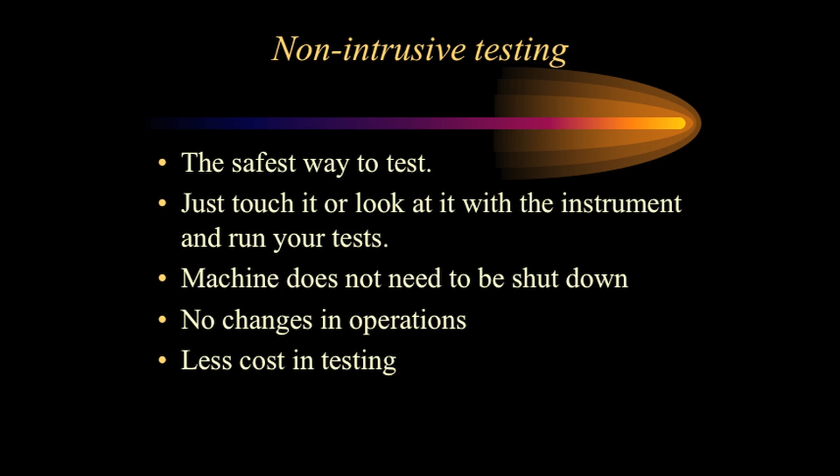Today we're going to talk about ultrasound, obviously. We're going to talk about some infrared, and then we're going to talk about some alignment. Okay. Non-intrusive testing is the safest way to test, if you think about it. We're not going to bother the machine. We're not going to interfere with operations, so that makes them happy. So we just touch it with the instrument or look at it and we run our test. It's a pretty simple operation.

Sounds pretty simple. The machine does not need to be shut down. In fact, we would rather have it at a minimum of a 40% load. I want to check it the way it runs, not while it's on vacation. Okay? So if it's in neutral, I'm not getting a true reading.

I want no changes in operation. Obviously, there's less cost in testing because we don't have to shut it down.

With that in mind, we need to think outside of the box. Since we were children, all our life we've been trained: if I can't see it, it's not there. We prove that every time we see something that bothers us, we cover our eyes. We duck from it.

If I can't see it, I don't have to worry about it. Ultrasound is the same way. Anytime we heard something we didn't like, what do we do? If I can't hear it, it's not there. I don't have to worry about it.

What I'm suggesting is there's a lot of things going on in this world that we can't see and that we can't hear. So we need to turn that to our advantage. We need to think outside of the box. This is not a Taco Bell commercial. We need to get outside of that and let our imagination go crazy, because when we do, we start using it to our advantage.

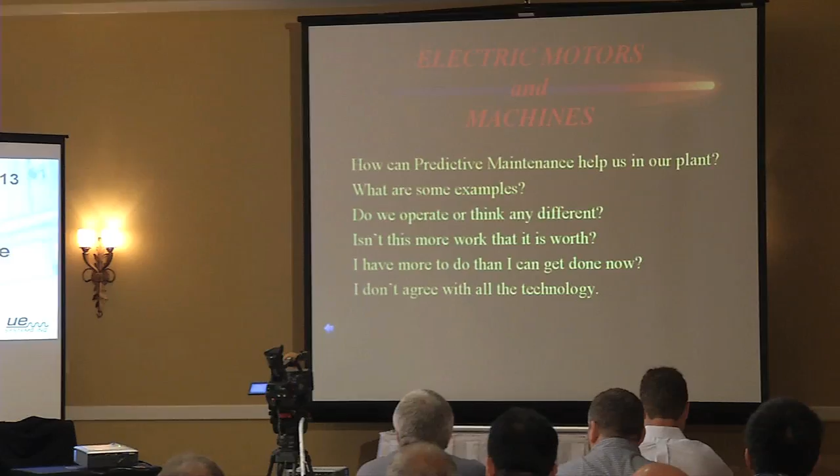The second one is the one that kills me. I actually have people I go in and talk to, and they say, I've got more work to do now than I can get done. I don't need you coming in my plant finding more stuff for me to do. The first thing I tell that individual is, if that's your attitude and mindset, you're too stupid, I don't want to work for you anyway. Why would I waste my time on a guy with an attitude like that? Because I guarantee you, I ain't changing his attitude. So I'm not working for him, I don't want to work for him.

Then I have this guy on the bottom who says, I don't agree with technology. This one kills me, okay? I do a lot of seminars around the United States, and the first thing I do is have everybody take their phone out and lay it on the table. They all do, and I look, there's a phone laying in front of every one of them. So then I take my box and go to the table and start picking up all the phones.

And the guys start screaming, I can't go without my phone. I said, whoa, wait a minute, this is the guy that doesn't agree with technology? I can take this phone right here, right now, and talk to anybody in the world. I can get in my bank, change accounts, transfer money. I can do anything I want to do with this phone.

10 years ago, if you were on the road and wanted to make a phone call, what did you do? Stop and put a quarter in a payphone. Find one today. If you find it, buy it, because it's an antique. Now, with that in mind, think about where we're at today and where we're going to be 10 years from now. That's scary. What we can do today compared to 10 years ago, and what we can do today compared to 10 years from now. You buy a computer today, by the time you get it home and set up, it's obsolete. Literally, it's moving that fast.

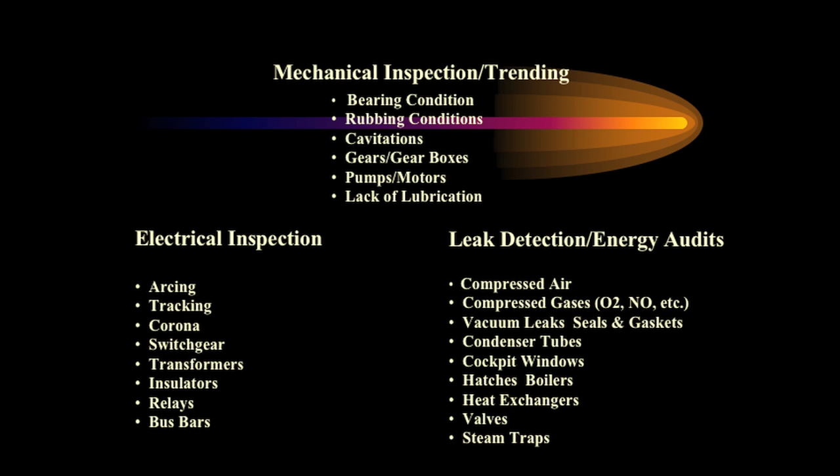I have used infrared and ultrasound on every application you see up on the screen. I'm not going to bore you all with going through every one of them, but if you see something up there that piques your interest, catch me after we're done here and I'll try to explain what we've done or how it happened.

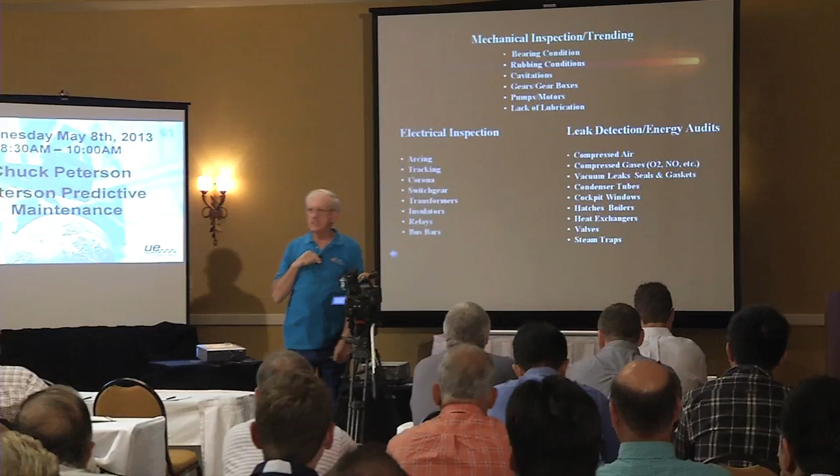The biggest bang for our buck is ultrasound. It's going to be right here, and safety-wise, it's over here. Anytime I go to an MCC that's got a whole big line of buckets where we're going to open all those doors, I take my ultrasound, put the rubber focusing module on it, and listen around every door before I open them.

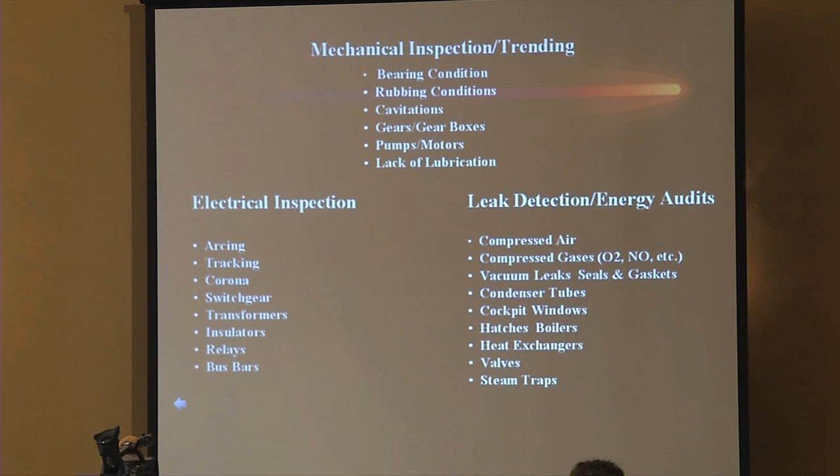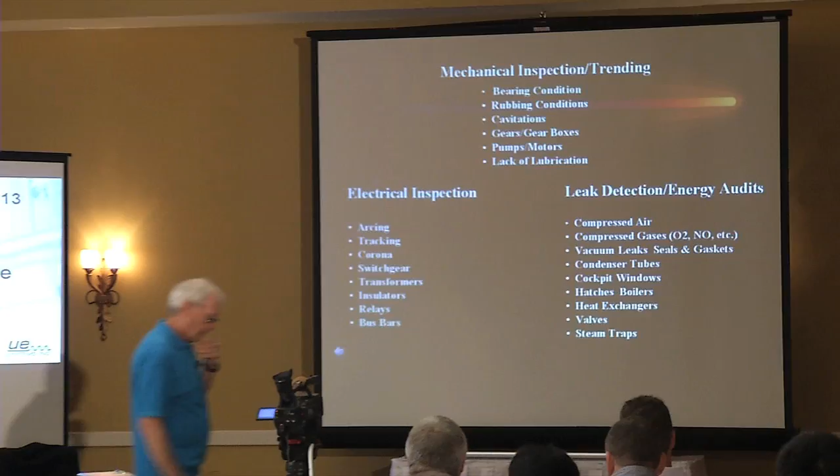If it sounds like an arc welder inside that door, I probably ain't going to open it. So we have the safety thing, and we have the arc flash thing we need to be concerned with. At the risk of banging on NFPA, I think arc flash is way overrated. It's dangerous, it is, and I'm very, very sorry that people get caught in arc flash. I open 25,000 buckets a year, and knock on wood, I've never seen an arc flash. I hope I never do.

So let's get real with numbers. We need to think about common sense. When we open a bucket, listen to it first. Even if you don't hear the sound, open the door using it as a blast shield, and then move around to the outside of 42 inches. Common sense. NFPA tries to dummy-proof it, and what we really need to do is get rid of the dummies. And that's what we're not doing. So we need to think about things like that. Okay, I'll get off my soapbox.

On the fire department side, NFPA, National Fire Protection Association, I fought them for 20 years because they write the laws so that they can't be sued. I can guarantee you, do we have any electricians in here? You've probably read up on NFPA 70E. By the letter of the law, if you haven't circuit tested every one of those breakers so that they kick out as they're designed to do, you cannot open that door.

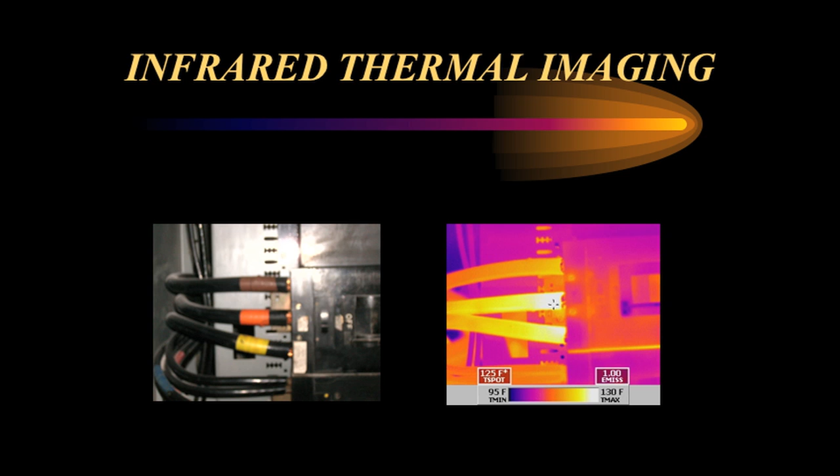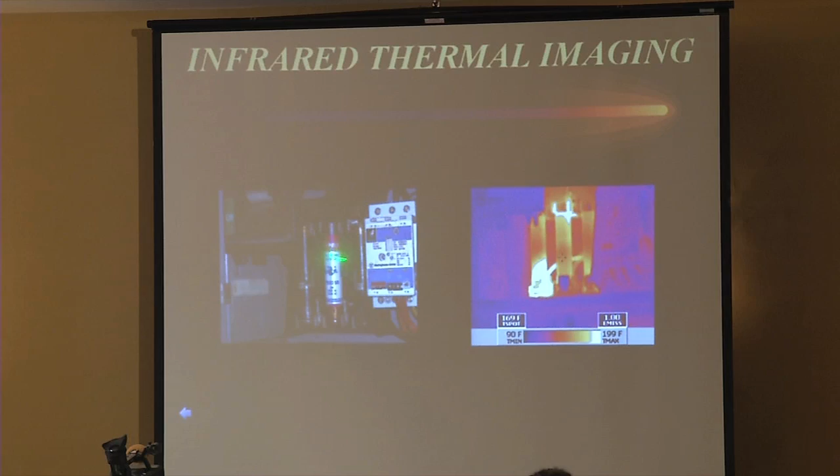Two different fuses. We have some electricians in here - when you put in a new MCC, you have a full box of fuses. You put 3 fuses in, they're all the same. What is different there? Different fuses. That tells me already we've got a problem. We blew a fuse at one time or another, so there's a problem straight away.

And the other thing is, this may have been the problem because we got a slow blow fuse in there. We didn't fix the problem, we just put a fuse in there to last longer. Now, if we don't have the infrared picture, we don't know we got a problem here.

Doesn't take a rocket scientist to figure out where our problem's at here. The lighter the color, the hotter the temperature, okay?

Again, loose connection - what is different? We got 3 phases, A, B, and C here. They're all coming from the same load, going through the same switchgear, going to the same motor. They should all 3 be relatively near the same. Well, obviously the situation here, they're not.

Okay, next one, this is another bucket the same way, it's just turned upright instead of laying on its side. But you can see in the center, we definitely have a problem here. So infrared is now showing us things we haven't seen before. It's going on, we just don't know it. If you don't have this picture and you look at this, you don't even know you got a problem, all right?

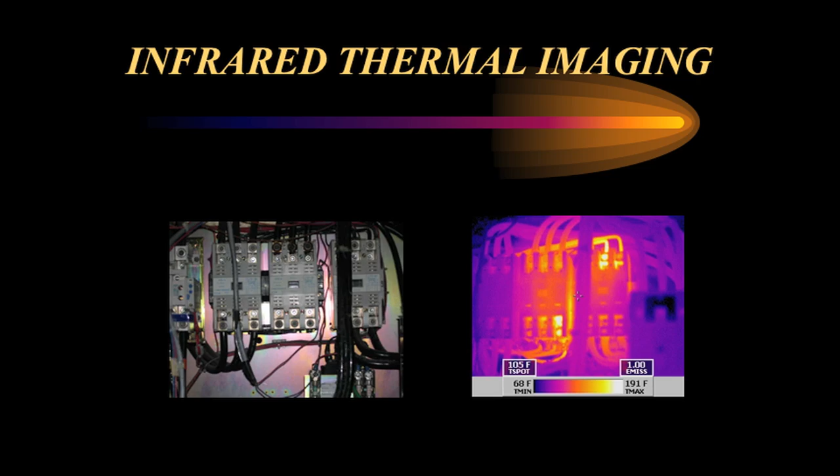Variable speed drives - how many people got variable speed drives? Everybody's got them, okay? These are notorious for having problems.

The reason why: when you energize a wire, it warms up. As it warms up, as everything else does, when it gets warmer, it swells. When you shut it down, it goes back to its natural state. So now when you're ramping your variable speed drive up and bringing it back down and ramping it back up, it's swelling and shrinking, swelling and shrinking. That screw doesn't move, so actually what's happened is swell, shrink, swell, shrink - we've got a gap in there now. The power has to jump across that gap.

How many of you can remember - some of you look old enough in here to remember - when I used to have my old car, I'd set my points with a little wider gap because I'd get more power and a hotter spark at the plug, because it takes more power to jump across that gap. The same theory is happening right here. More power, more resistance, more heat. What is different? Doesn't take long to figure it out here, okay?

Look at this one. That screw right there is loose. Look what's taking place here. This is a critical machine. I'm from Hutchinson, Kansas. This is a 500-bed hospital. This is the controller, variable speed for the air conditioner, 200-ton air conditioner that runs the entire emergency room.

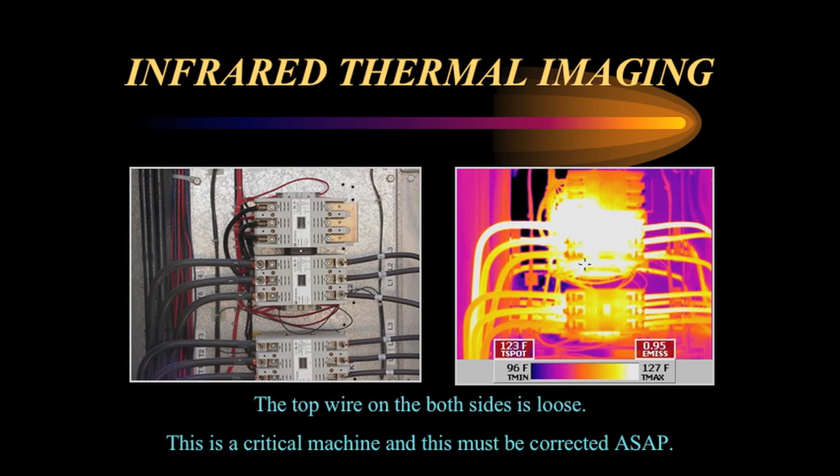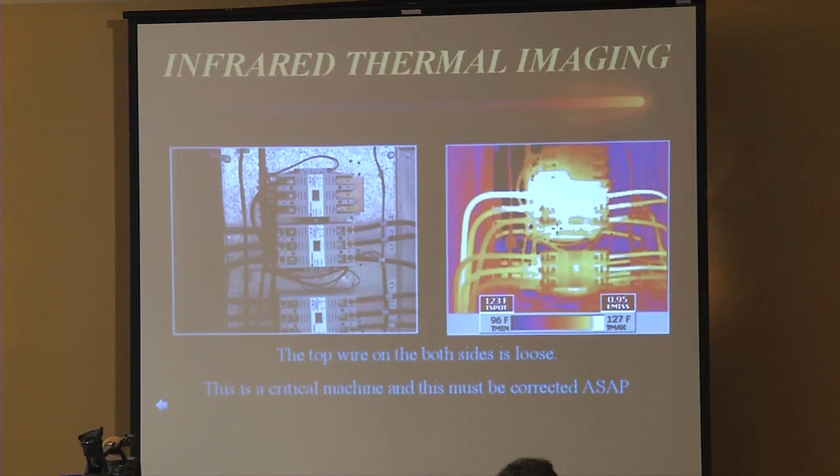Two things we have to think about here. The first one is doctors don't like to sweat. And they're pretty adamant about that. The second thing is nurses like it even less. Okay? So, what we have to do here is think about what are we going to do if we lose this air conditioner? All right? I found this on Friday, the Friday before Labor Day weekend. Early September. Okay? Pretty hot out, pretty warm out.

I called Bill and I said, Bill, we got to shut this machine down. He said, you are out of your mind. Remember, doctors and nurses don't like to sweat. I said, well, if we don't shut this down, somebody has to make a decision here, because if we don't make a decision, it's going to. When is it going to fail? I'm thinking about Saturday morning, 2 o'clock in the morning.

We don't have any staff here. What staff we do have is out at the lake, and they're probably drunk. So now I got to call them into work. We got to get this thing done under emergency conditions, so we're not doing things the way we should do them. So it's a fire department putting out the fire. I told Bill, let's shut the plant down. Let's shut this machine down. He said, no, we ain't doing that.

I said, okay, do me this then. Go to the thermostat and turn it as cold as you can turn it. He said, what's that going to do? I said, well, it's going to load that air conditioner up. But I want it cold enough in that emergency room that the nurses are wearing sweaters. He said, well, again, what's that going to do? It's going to buy us some time. Because I can come out there at 8 o'clock tonight.

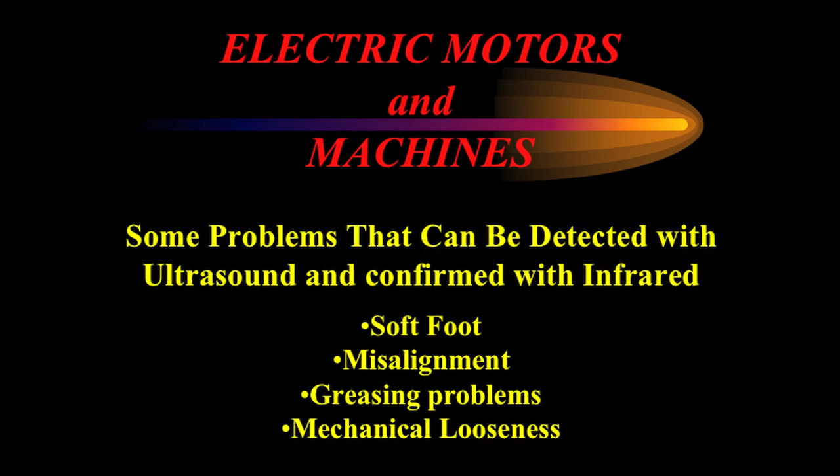Soft foot. Does anybody not know what soft foot is? Okay, what happens when we set a motor down on a skid or down on a base? That base has been machined so it's all level, okay? When we set the motor down, the feet of the motor have also been machined so that they're all level. How many of us have sat at a table that has one short leg on it and it wobbles, okay? So what happens if we bolt that down or we force that motor down and they're not all milled the same? We actually force one leg down like this.

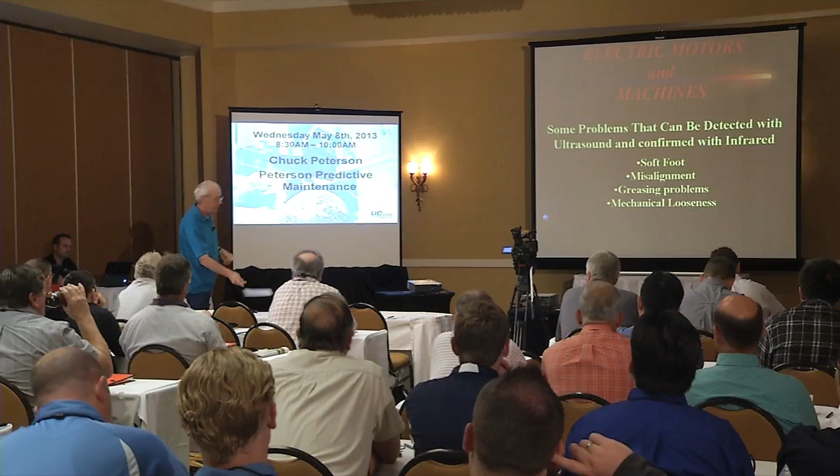What we've done is we put a twist in the motor case. We put a twist in the motor case, we're going to start seeing hot spots in the motor, okay? So we can see that. We also can hear that with ultrasound. All right, misalignment.

I've had people tell me that you can't see misalignment, you can't hear misalignment. I'm telling you that you can. I do it every day. My staff does it every day. They say you can't tell misalignment with ultrasound. I'm going to show you you can.

Okay? Greasing problems, a real pet peeve of mine. We've had some demonstrations on greasing and lubrication. This one here is a real pet peeve of mine, and we'll talk about it. And then mechanical looseness. The first thing we have to do, though, before we can do any of this, is we have to make a motor ready for service.

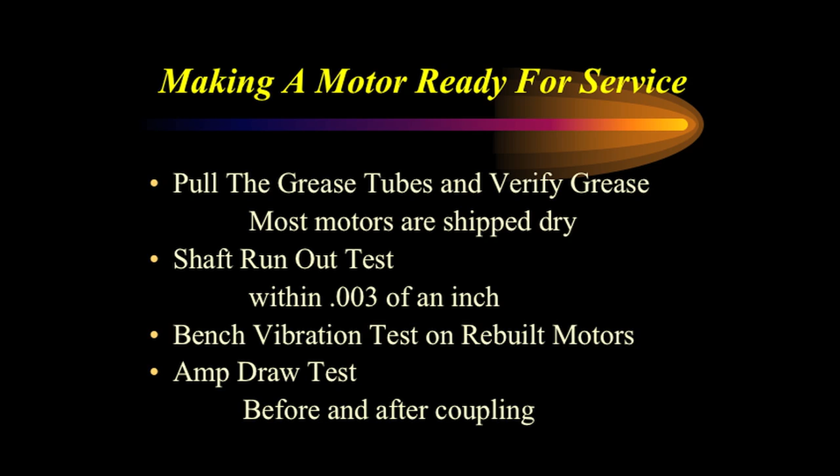How many of you, when you get a new motor in your plant, it's sitting here on the crate, how many of you pull the grease tubes out of the motor to make sure there's grease in them? Not one hand. I'm telling you, they are empty. You go back to a new motor and pull that pipe out of there, I would almost bet you my firstborn son that pipe is empty.

Because the motor company doesn't know if you're using moly-based grease or poly-based grease. So they don't put anything in there because moly and poly are like twin sisters. They don't get along. Okay? What happens is they'll form an acid that will eat the race out of your bearings in 3 to 5 years. So the only grease that's in that bearing is the grease that was put in at the factory, and that's to maintain that bearing during the shelf life before it's installed. That is enough grease in that bearing to actually run your motor for about a year.

How long is the warranty? So we got enough grease in there to go a year to get us just out of warranty, and then we're going to buy a new motor from the same motor company that just shafted us on the one that just failed because it wasn't greased.

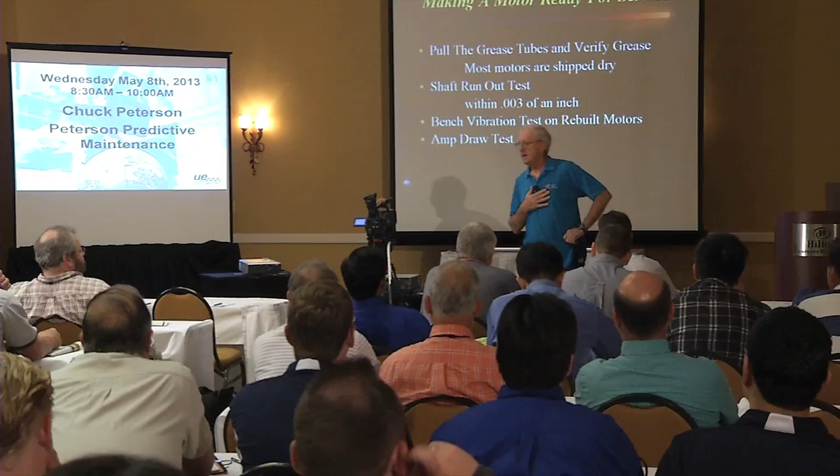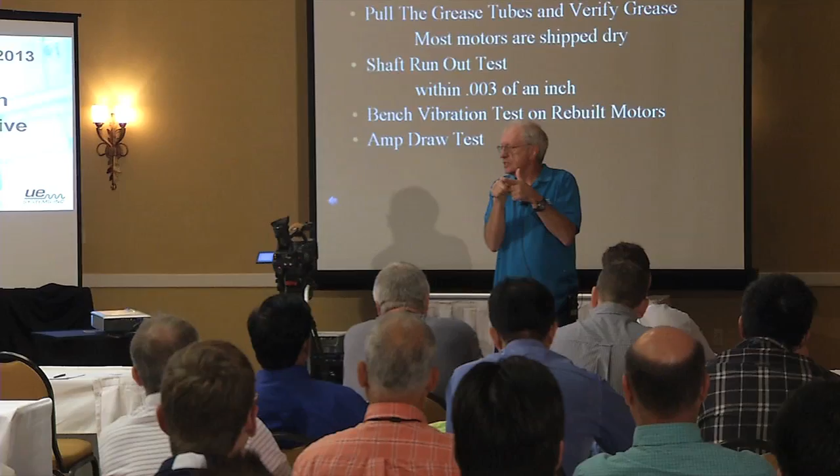So Gary calls me and says, I need a 100 horsepower motor. I said, okay. So I take it to Gary, and he sets the motor down on the bench, takes a dial indicator, puts it on the shaft, runs it from the keyway all the way around to the other side of the keyway. If it moves more than 0.003 of an inch, you do not accept the motor. Reject it. Send it back.

We're going to have to align this motor to within 0.003 of an inch. If it's 0.005 out over here, when you roll it to the other side, it's 0.005 out that way. We're 0.010 out already. There's no way we can align this within 0.003 if we start out 0.010 off. So you reject that motor.

So the motor company takes the motor back. They put it on the shelf. The next day you call and you want a 100 horsepower motor. What motor do you think you're going to get? You're going to get his reject, because they're not going to send it back in. They're going to send it to somebody that doesn't test their motors.

We have got to run that test. We've got to run that test to protect ourselves. I'm not an experimental field. I need reliability. And if I don't run that test, I'm shooting myself in the foot again, okay?

Bench vibration test. I ran vibration for about 6 years. I don't run vibration anymore. I can get better, faster, more accurate results with ultrasound than I can with vibration. I'm not saying vibration is bad. I'm just saying I can do it faster and quicker and get the same results with ultrasound.

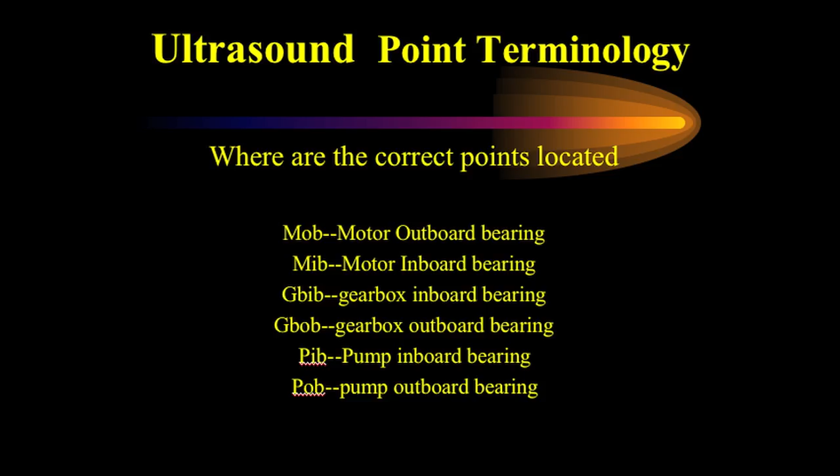Now you hear drive end, opposite drive end, shaft end, fan end, all of that different terminology. If we would just standardize to motor outboard, motor inboard, gearbox inboard, gearbox outboard, pump inboard, pump outboard, it's pretty easy. The pump outboard, that's the impeller out on the end. It's kind of like the fan on the other end, isn't it? So we started at the fan end of the motor and just took the power stream right through the machine. And it makes it a lot easier.

Now, if Peter from London calls me and says, Chuck, I'm having a problem with this motor outboard bearing, I know exactly what bearing he's talking about because we're on the same page with terminology. If he says, I have an opposite shaft end bearing that's giving me a problem, I'm thinking, what are you talking about? But when he says motor outboard bearing, I'm there right now. No question about it, okay? This is very important. So that's something we really need to pay attention to, okay? Next, yes?

Gearbox, follow the pattern, okay? I have a motor here, a gearbox here, and a pump here. Input side, exactly. Your gearbox depends on if you have an intermediate gear or if it's just a direct drive. You have A shaft and B shaft, or A shaft, B shaft, and C shaft. But it's gearbox inboard A shaft, outboard A shaft, inboard C shaft, outboard C shaft. You have an inboard side and an outboard side of the gearbox as the power goes through the machine. Okay?

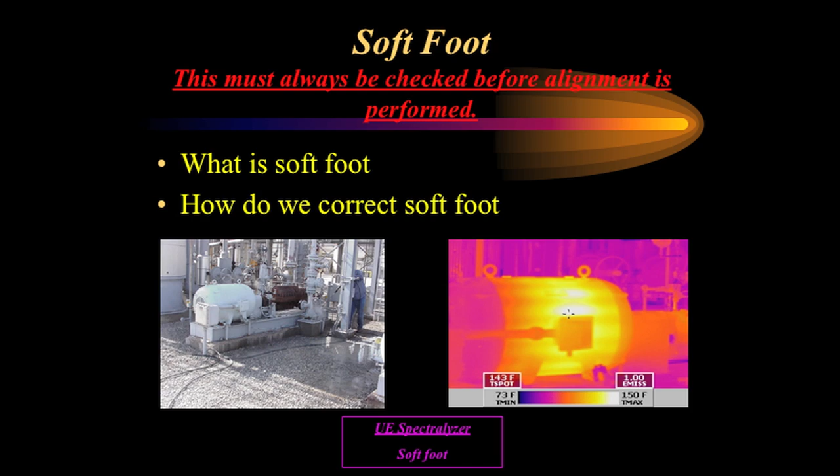All right, soft foot. Here's one right here. Remember I said we put a twist in the case? This is an example of it. That's the hot spot that's going to show up with infrared. We have a 10 thousandths soft foot under that foot right there. That is a 300 horsepower motor running on 2300 volts and costs about $25,000. And we're wasting the motor because we have a 10 thousandths soft foot that's not been corrected. This was found with ultrasound.

Can you drag the Spectralyzer over onto the screen? Okay, we need to go up to File. May have to drag it. Soft foot before. Should be down at the bottom of the list. Okay, play it. Listen for the surge.

Can everybody hear the surge in that? Okay, what we did was we corrected the soft foot. All right? Now, remember we've got one foot that's 10 thousandths, right? So logic would say we let that foot come up and put a 10 thousandths shim under it. But remember the table that rocks with the short leg?

Okay, instead of putting a wedge underneath one leg, what we should actually do is put a wedge underneath the two opposite legs. So instead of a 10 thousandths shim going under one corner and letting the motor sit there already crooked, we put 5 thousandths over here and come to the opposite corner and put 5 thousandths there. So we stop the rock. Okay? So that's what we did. Okay, play the next one. It should be soft foot after.

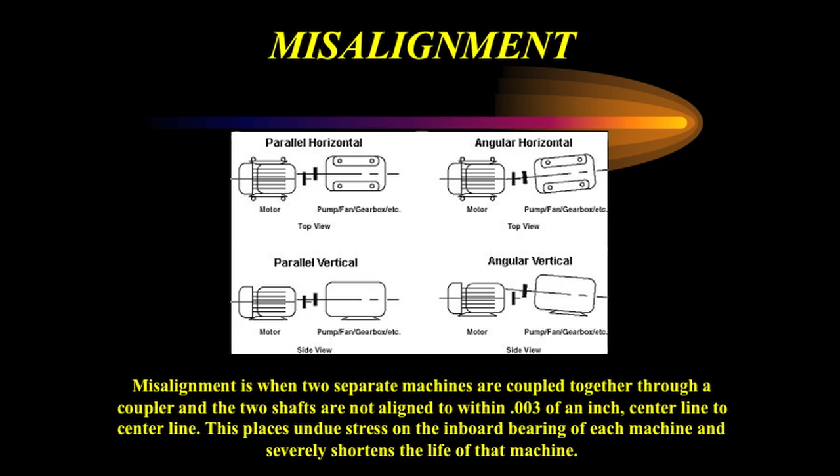This is what we have for misalignment. If you notice the bottom of the motor, here we see all 4 feet. That means we're looking down onto the motor. Here we see just one set. That means we're looking at it from the side. Okay? You can see the types of misalignment we have: parallel and angular misalignments. Okay?

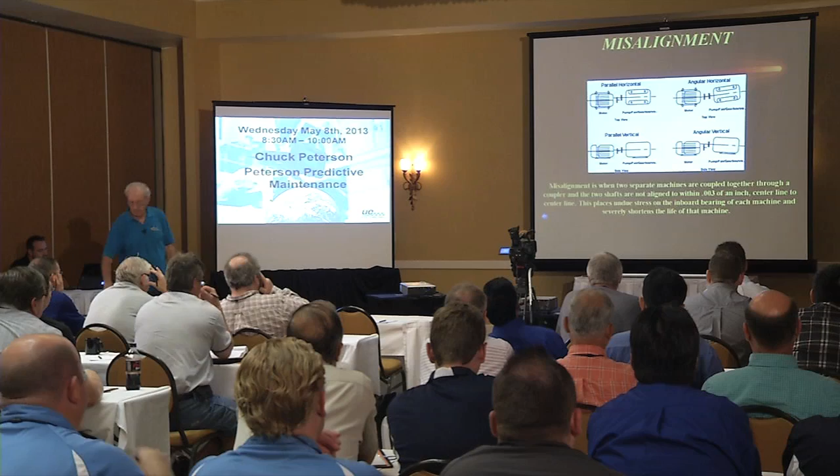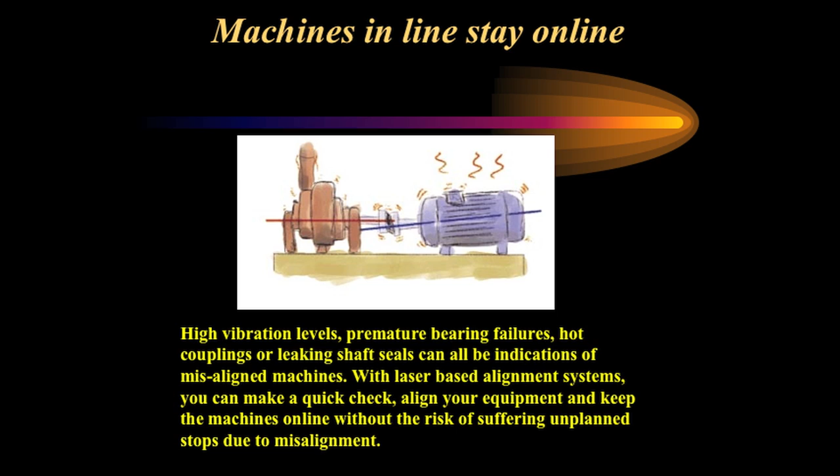This happens every day. Every day. This is what it usually feels like. Okay? This motor over here has got 4 bolts holding it down. That's it. And the coupler. That's it. The pump out on the end, it's got all this big piping and all this bracing and all this stuff. It don't shake a lot. But that motor's out here jumping all over everywhere. Okay? That's another indication of misalignment. Now we've got 2, right? We got the motor jumping around and we got the louder bearings. Okay? So let's move to the next one.

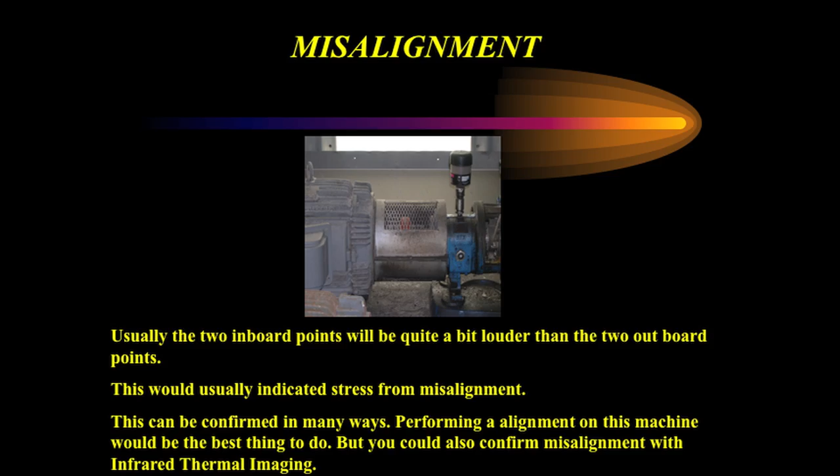We look at this motor. This motor to the eye appears there's no problem at all. We take an ultrasound reading. The 2 inner bearings are louder than the 2 outer bearings. I pull my camera out and look at it. Doesn't take a rocket scientist to understand this picture. Okay? Right away, I have now combined 2 technologies to prove one point. That's the importance.

I could take a vibration on this and find I would have a big spike at 2 times the turning speed, which indicates misalignment. Okay? So it doesn't take very long to figure this out. The idea is we're thinking outside of the box. We're hearing things we've never heard. We're seeing things we've never seen. And we're using it to our advantage. Okay? Let's look at this.

We realigned this machine. This is the way it was when we found it. Look at this, 91 thousandths out of alignment. This one must be the one they used the 2 squares on, or the tape measure. But you can see after we aligned it where it's at now. Those are not thousandths. Those are tenths of a thousandth. This machine was to align to less than 1,000th.

When we first started on this machine, I could take the coupler and I could barely turn it over. When we got done, I could lay my hand on the top of it, let it fall off, and watch the motor coast to a stop. That much stress was taken out of it because of the misalignment. How much easier would that motor run if it's aligned properly? How many less amps would it pull if it's aligned properly? So now we're not only saving the machine, but we're using the energy efficiency aspect of it.

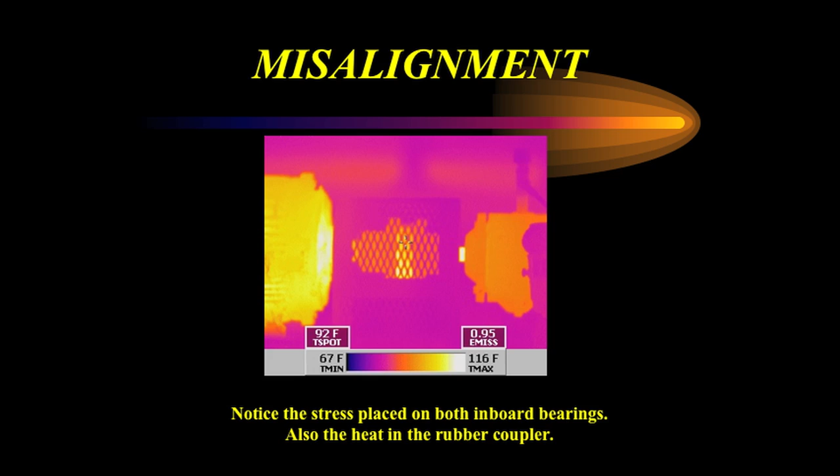How many of you have taken a piece of wire and take it back and forth like this till it breaks? Gets hot, don't it? That's what's happening to that piece of rubber in the center of this coupler. Those hubs are sitting here doing this, and they're actually heating that rubber up. There's no other reason for that rubber to be hot. You see on the sides, the coupler's not hot, or not that hot, so why would the rubber be hot? Other than the fact that it's just sitting there beating it out. Okay? Misalignment.

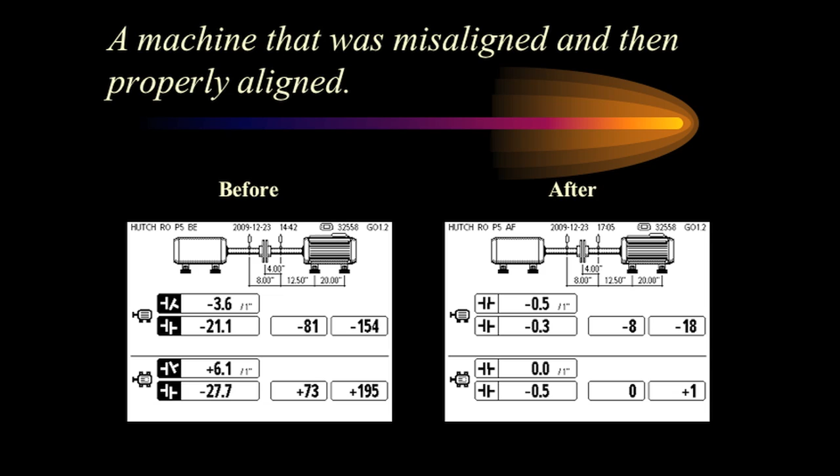You can also see how when we realign this one right here, dead center. That can be attained. That can be done if you do it right the first time, and you take the time to do it right. Now, this machine goes down. I got management back here chewing on my backside. Let's get it done. I got to get it up and running. And I'll turn around and tell them, and I'll tell you what, it'll make them mad.

Hold it. You give me time to do it right the first time, I only have to do it once. If you hurry me, where it's in emergency conditions and I get in a hurry and start putting my hands in where they don't belong, or start taking shortcuts, and then I come back without a finger, it's going to be a lot more expensive to do it that way than if you just allow me the time to do it right. I only have to do it once, instead of doing it wrong in a hurried fashion and having to come back here in 6 weeks and do it again because the motor failed. So the point is, take the time to do it right the first time.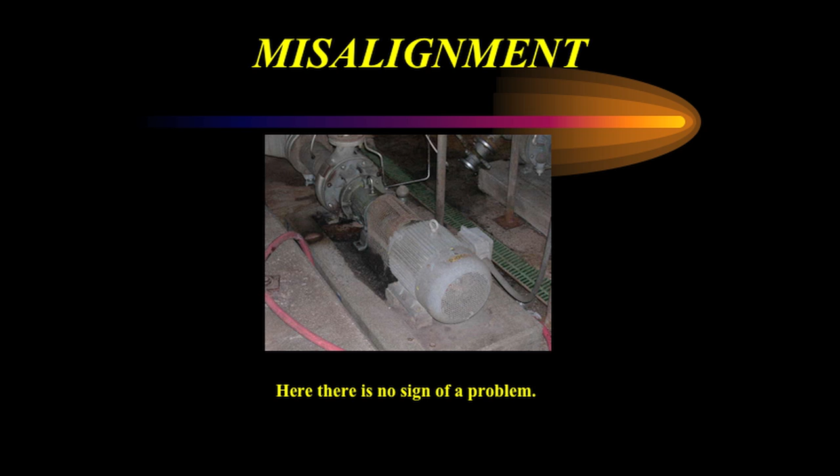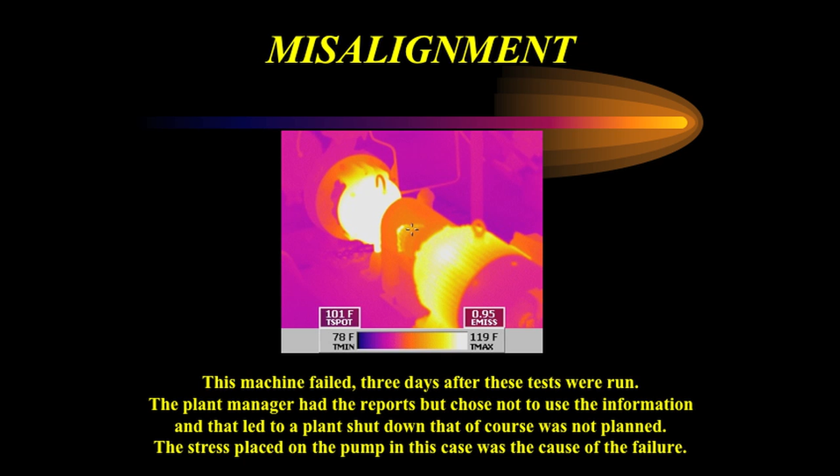This machine appears to have no problems at all. This one here is a classic. Appears to have no problems. We look at it with infrared. The sound, the ultrasound, told us it was misaligned. We look at it with infrared. Obviously, look at that pump. That pump is not long for this world. 3 days after we run this, we give them the reports that day. 3 days later, they decided they didn't want to shut it down. They're not going to take care of it. That night, it failed, and it shut the plant down. Shut the entire plant down because they didn't want to take care of the problem when they had the opportunity.

This is one that some guys wanted me to throw in. I showed them last night, so I'm going to throw this in for Stan real quick. This motor here was like that little cartoon we seen a while ago. It's shaking and jumping around, okay?

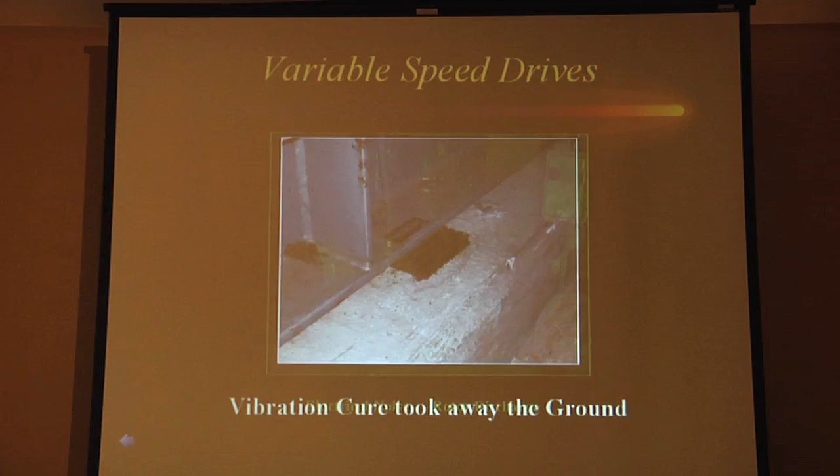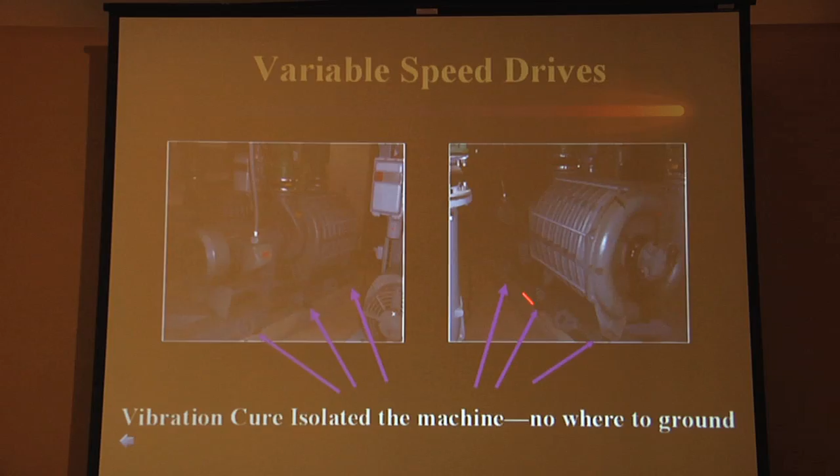So they decide they're going to fix that vibration in it. So what they do is they put vibration dampeners in it, under the feet, under the skid, all the way around it, okay? And they done a good job, they put a lot of them in. But what they also done was they insulated this motor from ground. Look here, those are rubber expansion joints to keep the vibration from working on the piping, okay? Right here, that's PVC. So everything they've done to this machine isolated it from ground.

It's a variable speed drive, okay? So now what they've done is, by isolating it from ground, they were actually having a rotor charge up. It started fluting the bearings in the motor, so they put ceramic bearings in it to stop that. Now, because it's still isolated from ground, it's going from the motor through the shaft, through the coupler, through the blower, out to this bearing right here, and that bearing on the outside failed. And they wondered, well, we put ceramic bearings in it, why did it fail? Well, it's got to go to ground somewhere. Because that's a thrust bearing on that end, the grease film or what little bit of insulation there was is a lot less there because of it being a thrust bearing, and the configuration of the bearing, it went to ground quicker there.

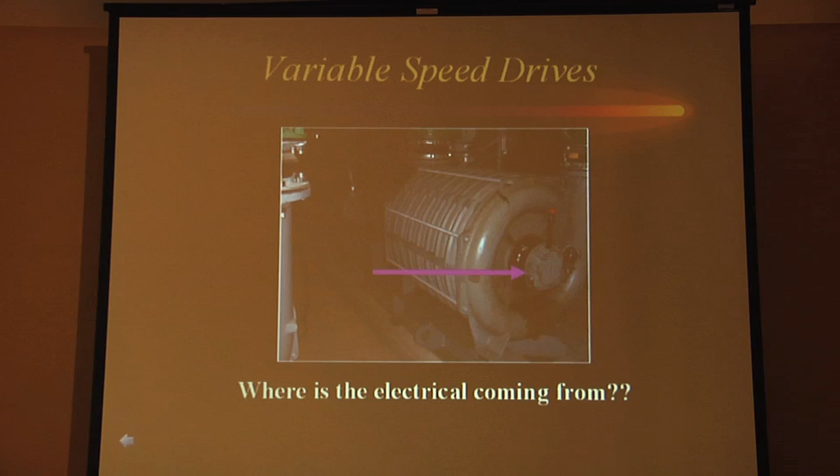Okay, now the killer. The real killer of this is that motor was shaking around the way it was. We checked it, it was 65 thousandths out of alignment. That's why it was shaking. So they put rubber feet under it to try to solve that problem, and they created a bigger problem than they had to start with. We took the rubber feet back out from under it, aligned it the way it should be. That was 2.5 years ago, and this machine still runs today because it was aligned properly to start with. So sometimes we get into a rut, or we jump to a conclusion, and we don't really know what's going on without checking out all the factors. And that's exactly what they done here. They created more of a monster than they had to start with. But they never checked everything to start with.

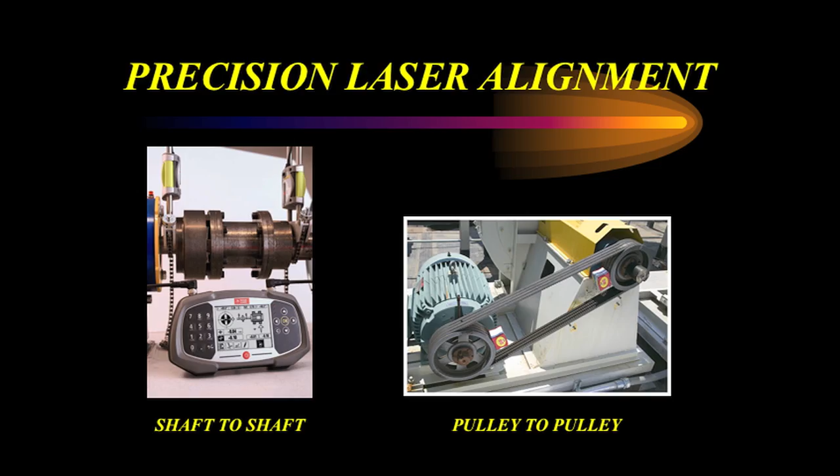So we'll move on. This is the lasers that I use. This one here is for the shafts. These are for pulleys, and I can align belts and pulleys on 3 different planes with those, okay?

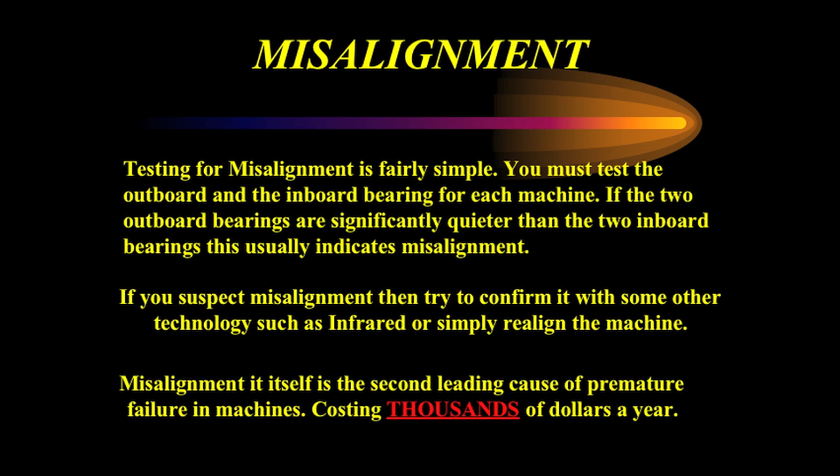So testing for misalignment. Testing for misalignment is very simple, we just done it here a while ago, okay? We want to confirm it, okay? Can it save the bottom line? Obviously, it can add thousands and thousands of dollars, okay? So, we move on.

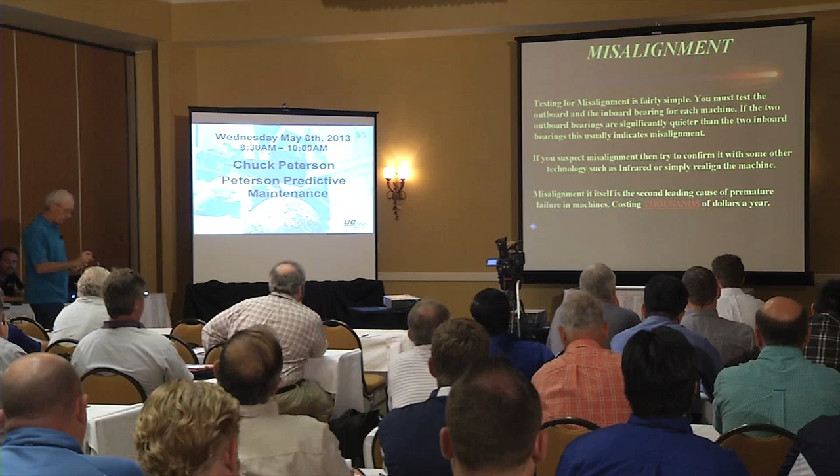If misalignment is the number 2 cause for premature motor failure, what's number 1? Improper lubrication, thank you very much. So many times I hear lubrication, that's not always it, because sometimes it's better not to lubricate it at all. Because we have people in the field that say, you know what, if 3 strokes is great, 6 strokes ought to be freaking awesome.

They're killing themselves doing that exact thing. It's kind of like the arsonist when I was investigating fires - if 1 gallon of gas makes a pretty good fire, 50 gallons ought to really make a blower.

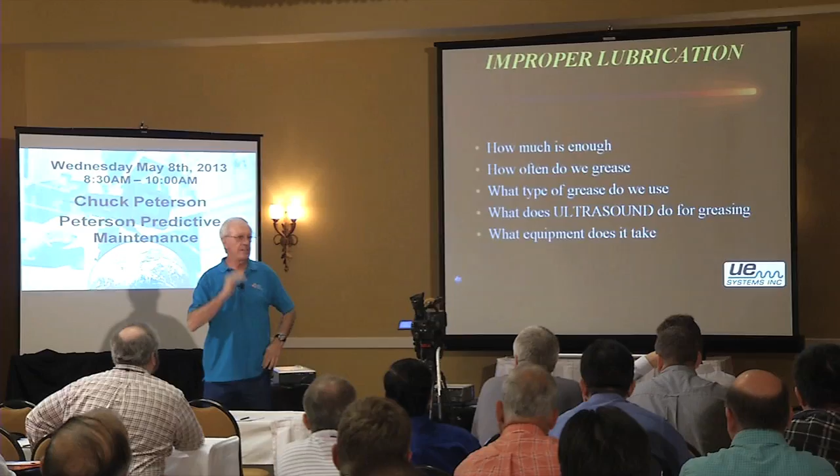We can't operate under that theory, okay? So what happens is, how much grease is enough? How many of you have taken your grease gun at home and just went squirt? How much grease is that? Nobody knows. Nobody ever checked.

I would suggest you all go back and get a 1-ounce shot glass. Is there anybody in here that doesn't know what a 1-ounce shot glass is? Okay, everybody pretty well knows what that is.

Now, if I take my grease gun and I stand here, it takes 10 strokes to fill that shot glass, okay? The next time I go grease this motor, it takes 3 strokes for me to quiet it down. I just put 3/10 of an ounce in there, didn't I? Document it. Right there, it's got to be documented.

Because 6 months later, I'm going to come back when that motor's making noise again, and I put 5 strokes in it. I look back - whoa, it only took 3 strokes a while back. It takes 5 now. It's going downhill. Write it up.

Now you have a way to measure how much grease you're putting in there. Didn't have that before, okay?

Next thing, what kind of grease are we putting in it? What grease do we use? If you're using poly, that's the blue - doesn't make any difference what grease you're using, I would go back to my plant and buy a brand new grease gun. And I would paint it hot pink or day-glo orange, something really loud and bright, okay?

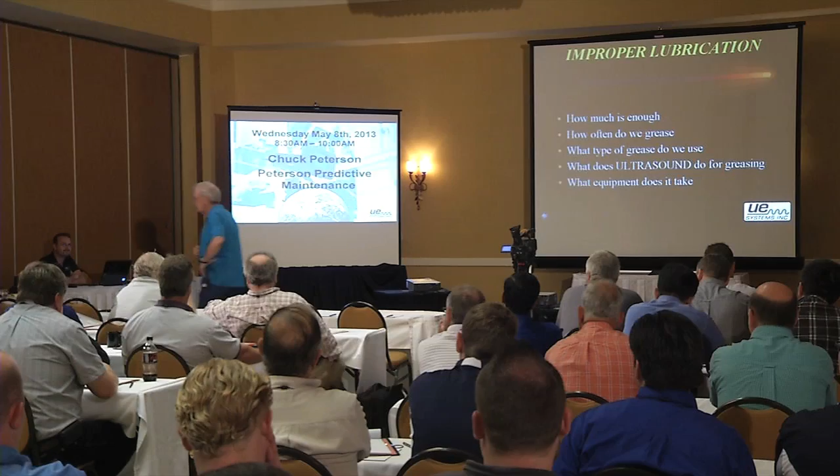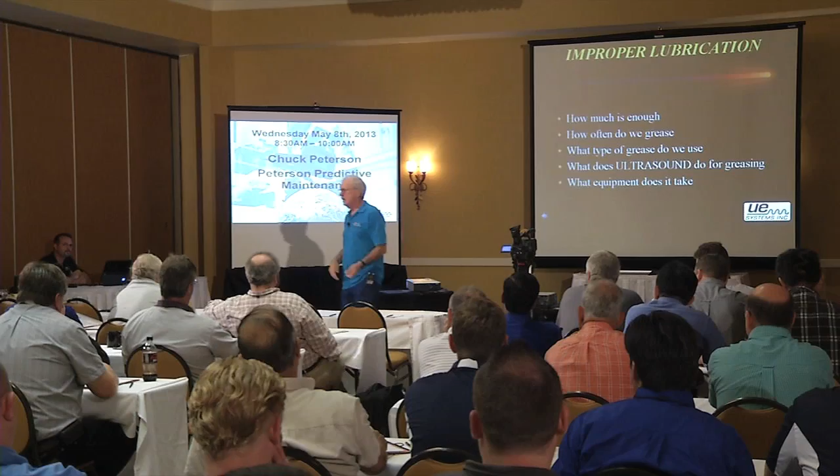Point being, that grease gun is used on electric motors. It does not touch anything else. I hate to see somebody take a grease gun and put it on a pillow block bearing after they wipe all the dirt away from it, contaminate the tip, and then take it and put it on my $20,000 motor and pump that dirt into the bearing.

Quit doing that. Buy a hot pink grease gun.

If I see somebody grease an electric motor with anything other than my hot pink grease gun - there's my grandson, I'm kicking his butt, okay? If I see any grease gun on that motor other than that hot pink one - and I better not see that hot pink one on this pillow block bearing contaminating the tip over here.

I don't want you pumping sand into my motor. A pillow block bearing, we can grease that like it says.

How often do we grease? A pillow block bearing, we grease it till we see grease oozing out of it. There's that farm mentality - we're not greasing the bearing, all we're doing is purging the dirt out of it.

Okay, so what type of grease? We talked about that. How often do we grease? Book says every three strokes every 6 months? Timely intervals - I'm telling you, throw the book away.

Throw the book away. If you start greasing with ultrasound the way you're supposed to, the new technology, we can throw that book away. If I have a 100 horsepower motor sitting right here that runs 24/7, and another 100 horsepower motor that runs 2 hours a week, how in the world can I grease them both the same, like the book says? One's not going to get enough, the other's going to get way too much.

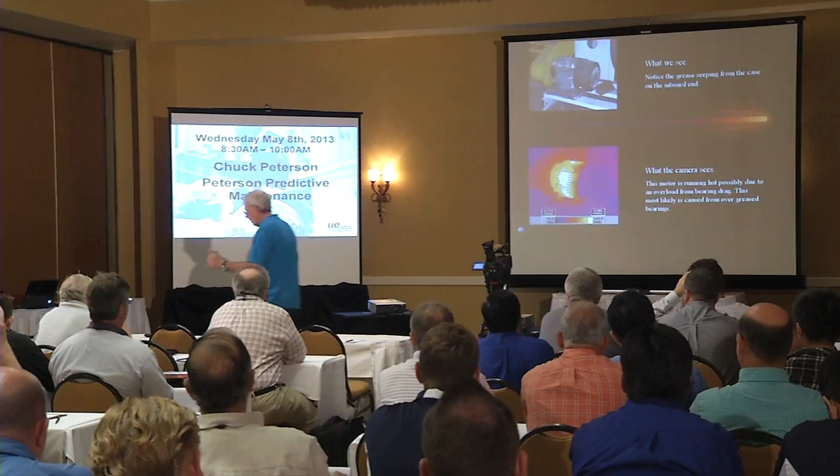It's put on the wire to direct the flow of current the right direction. Now, if a motor, all the windings inside that motor are baked with varnish. That is the insulation, okay? So that's directing the flow through the motor the way it should go.

One magnet chasing another one. That's all that makes a motor turn, okay? Now, if we over-grease it, what happens is the balls push the grease to the outside, and now we have a tunnel in that bearing for those balls to run in. And we keep greasing, and the grease gets out into the windings. And then the grease dissolves that baked on varnish, so now we got current going all different directions instead of flowing through the motor like it should. So we have a weak magnet and a strong one and a weak one, and so our motor loses power.

It starts to heat up. What's the first thing we do? You put grease in it. That's what killed it. But that's what we do every time, even when we see this and we know it's over-greased.

I asked this guy, how much grease you put in that motor? He said, Chuck, it's a 25 horsepower. I said, yeah, how much grease you put in it? He said, it's a 25 horsepower. I put 25 strokes in.

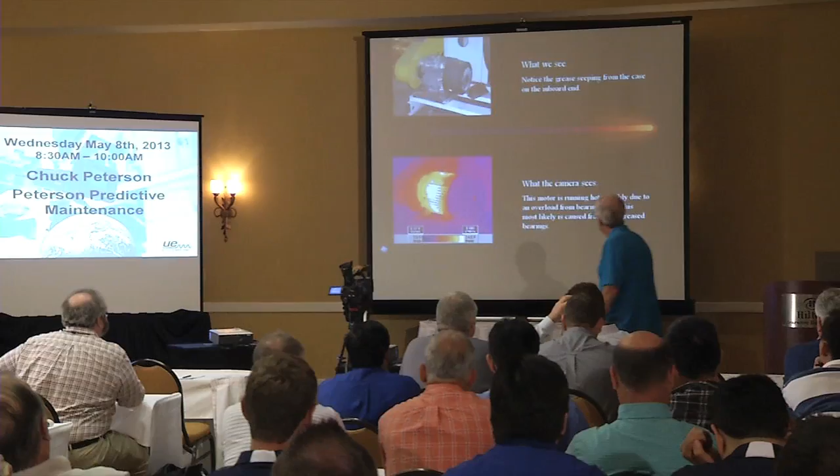I thought to myself, what do you do with a 600 horsepower motor? Pump a 55-gallon drum in there? That's the kind of people we have in the field doing that kind of logic. We can't, what did I say a while ago about getting rid of the dummies? It's amazing. Okay, so let's look at the next one.

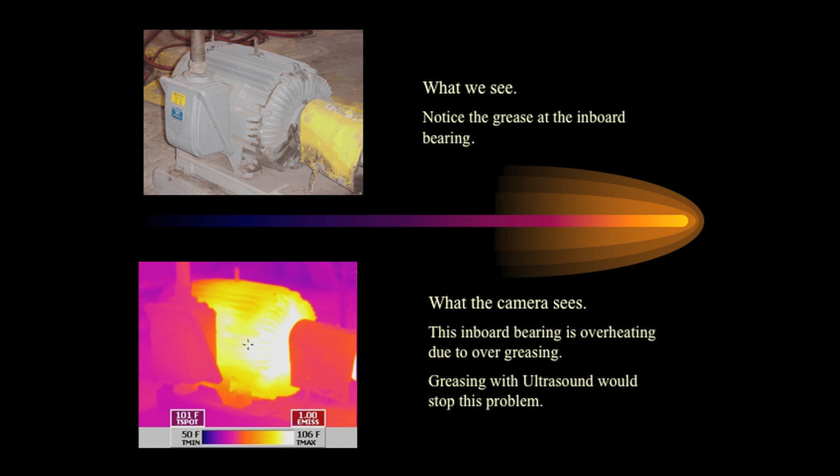Here we go. Again, that tunnel that the balls are rolling in becomes an insulator. It gets hot, it breaks down the base, moly or poly, and then it starts slinging all the oil to the outside, centrifugal force. And it starts leaking around the end bells. Classic sign of over-greasing, okay?

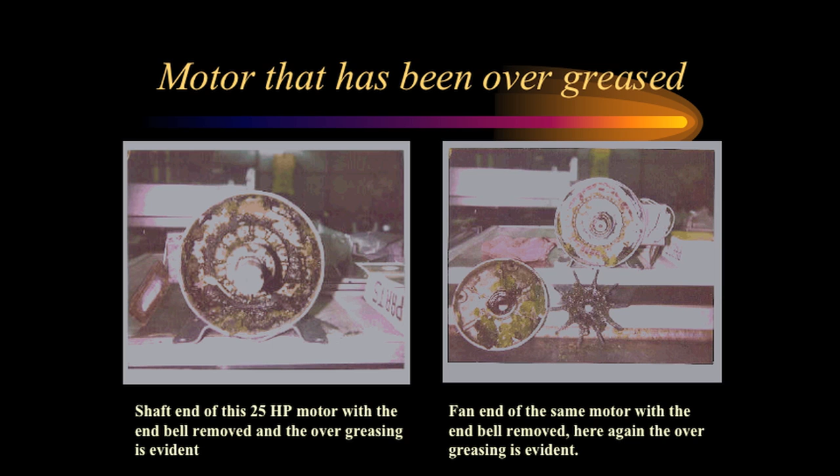Remember the motor, 25 strokes, 25 horsepower? You think I was kidding you. That's it. No wonder the motor's losing power. No wonder it's getting hot. It's amazing what we find in the field when we start looking at stuff like this.

That one's not bad. Look at this one. You know, after about the 7th tube of grease, somebody ought to be asking where it's going. And the other thing that bothers me is, look here. It's a shielded bearing. You couldn't get grease in it if you wanted to. Then why does it have a grease zerk in it?

I talked to the maintenance man. He said, well, we needed to grease that motor, so there's a pipe plug in there. So we pulled it out and put a grease zerk in it. And we greased and greased and greased, and we never did get it to quiet down. I'm thinking, oh, here's one of them dummies we got to fire.

The pipe plug is put in there for a reason. That's telling you it's got shielded bearings in it. Don't pull it out and put a grease zerk in there. In my plant, I will not accept a motor that has shielded bearings. Okay? If you're not greasing with ultrasound the way you should be, you can use shielded bearings, because what it's going to do is keep you from over-greasing that motor. That's exactly why it's there, to keep you from over-greasing your motor.

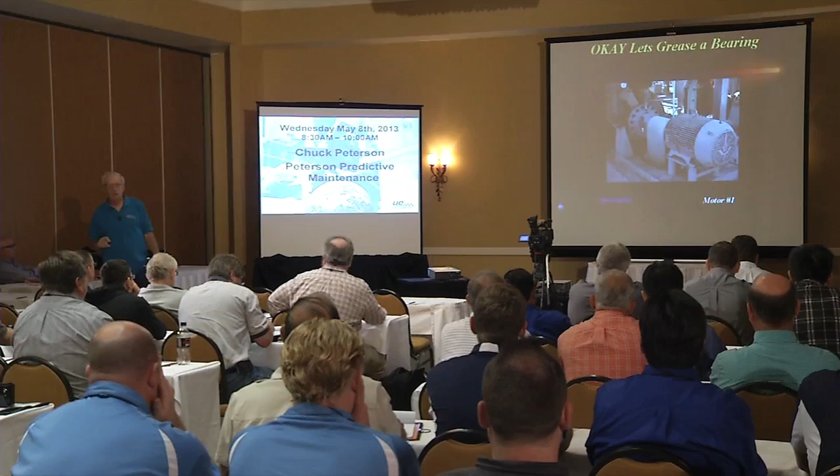Now we have all of this propane out in the air, and it expands 242 to 1. 1 cubic foot of liquid expands to 242 cubic feet of gas. Gas is what burns. It fills the river in Hutchinson, Kansas, and follows the low areas, all the way down to Wichita, Kansas, and finds a place to ignite. Somebody's hot water heater kicks on, lights that, and it flashes all the way back to the leak. In about 10 minutes, we've covered Reno County in about 4 foot of propane. Cannot happen. Cannot happen. It is not an option.

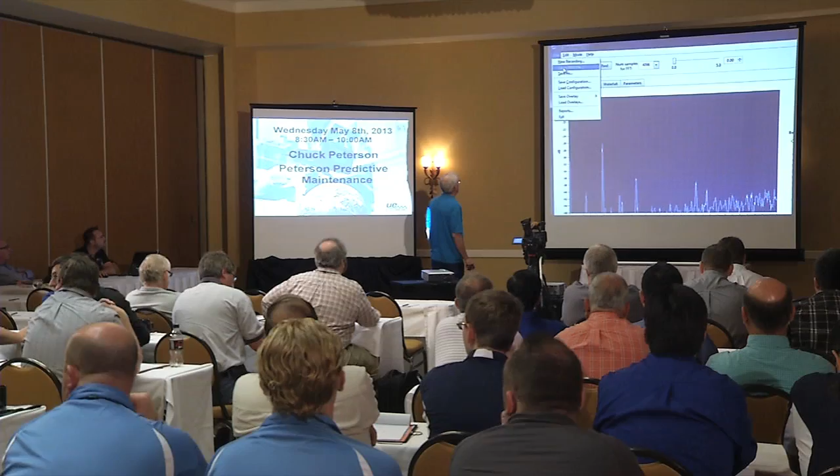So we grease this motor with ultrasound. Bring the Spectralyzer back over there, Stan, and we're going to grease this motor. Go to File. There you go. Now you can drag that down here where we can see it, or you can do it. It doesn't matter. We want bad bearing, or the grease bearing number 1.

Bearing dry, right there. Nope. Yeah, play the dry one. This is the bearing that's dry, okay? Listen to the choppy sound in it. You're going to hear it. It's going to sound like plastic, potato chip sack, cellophane is what I'm trying to think of. Crackling, okay? Hear the crackle in it?

Okay? Play the next one down now, Stan. I think the next one down is the bearing being greased. Listen for the change, okay? Listen for the change in it. The Spectralyzer doesn't concern me as much as listening, okay? That was recorded with the 10,000.

I'm here to tell you today, there is no reason anyone should ever over-grease another bearing. That is the proof. That is predictive maintenance. You go through your plant, I check 400 bearings in a plant, I might grease 2. Because I'm not going to go through my plant and put 3 strokes in all 400 bearings. It's crazy. Let's do it the way it should be done. Accept the new technology. Listen to what your equipment is telling you, and do what it advises you to do.

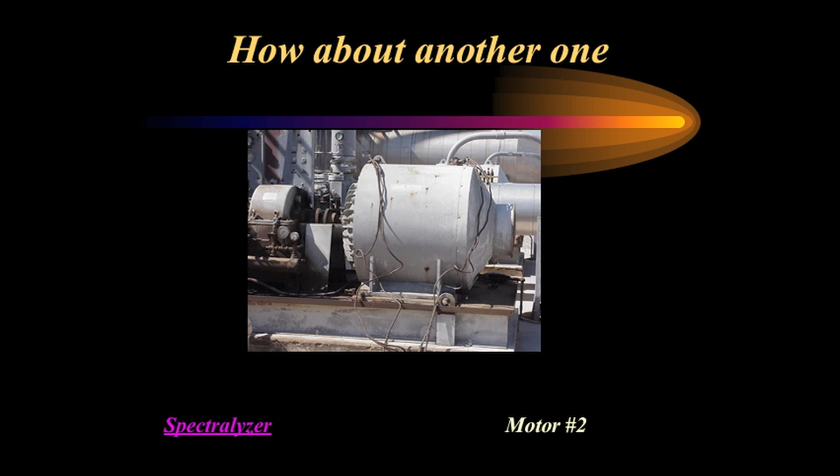Okay? Now we have several examples here of motors. Here's that 600 horsepower motor. It's got a 55-gallon drum of grease in it. Okay? So you see what happens when we start thinking about bearings. The thing about it is they're all going to be the same. This motor turns at about 1700. The compressor that it's driving turns at 13,000. So again, it's not an option for it to lock up. We're going to lose it, okay?

This one, a 200 horsepower motor, this little gearbox right here is pretty hard to see. It's a Sundyne gearbox. It's about this tall. Cost $250,000. It turns an impeller that's about this big at 27,000 RPMs. It's a hydrogen gas compressor. If one drop of liquid hits that compressor, this motor crashes.

The whole thing, because of the difference in molecular weight of the hydrogen gas versus the liquid, when it hits that impeller, it'll crash it. Literally, I've seen the case fly apart. So that's not an option. At 27,000 RPMs for that motor to just go is not an option. We cannot do that. So that's why we use ultrasound for lubrication.

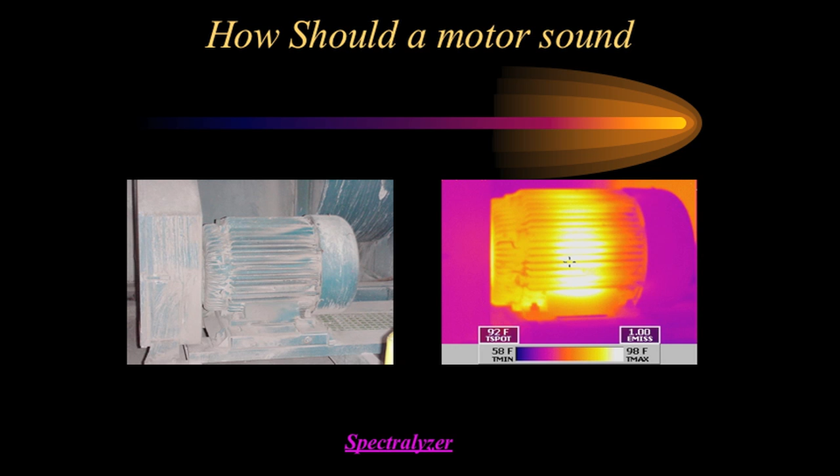Okay? What should a good motor look like under infrared? Here's a perfect example. Notice the center of the motor is warm, the inboard bearing here is cooler, the outboard bearing here is cooler. If I look at an electric motor with infrared and I ever find either one of these bearings warmer than the center of the motor, I have a bearing problem. I don't know what it is yet, but I do have a bearing problem.

Think about this. When that motor started up and it's up to speed, it rises to magnetic center. That rotor inside there rises to a magnetic center. It will also move axially, lengthwise, to magnetic center. So once our motor's up to speed, then our bearings are not even loaded. The magnetic center is what's driving the position of the rotor, not the bearings anymore. So there's no reason for the bearings to be hot. No reason we should ever have a bearing hotter on either end than the center of the motor, unless we have a problem.

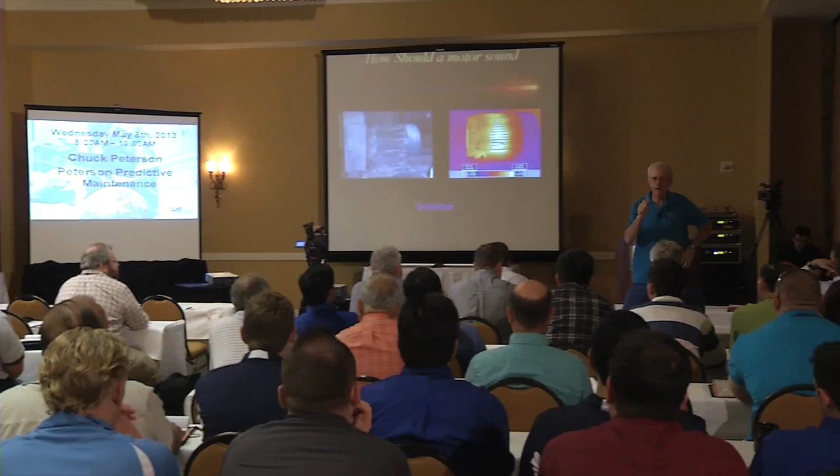This happens to be a belt drive. Do I have the belts too tight and I'm pulling that bearing over into the race and it's heating up from the friction on that one side? Which brings us to another point. The junction box is on the other side of this motor. When I send the motor into the shop, I want my bearings marked. When you pull a bearing out of one of my motors, I want the outer race peened on the same side as the junction box.

Now, when you send my motor back to me, those bearings better come with it. Because if they don't, I'm not accepting the motor. When I get those bearings back, I put them in a solvent tank, clean them up and get them all nice and shiny, and then put them in a chop saw and cut them in half. Now, where that peen mark is tells me the exact position of that outer race. The inner race turns, the outer race is stationary.

If I look, right there's a peen mark and this whole side is galled out and it's a belt drive, what's that telling me? I probably have my belts pretty tight there if I pull that bearing over to that side. What happens if this side of the race is bad and this side of the race is bad? There's a chance I had my bearing cocked in there, okay? So now, instead of just throwing bearings at a problem, let's try to find out what the problem is. Prevent the problem from happening again, okay? So those are some things that I insist on.

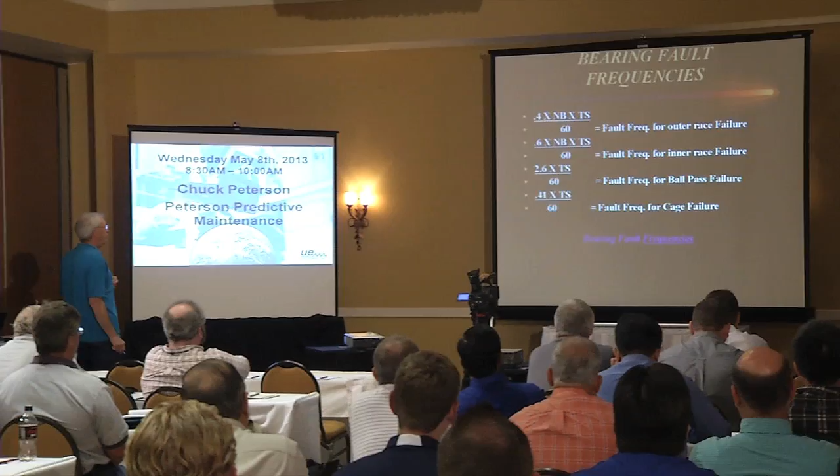This is the formula. I mentioned earlier that I can get the same results quicker, better than vibration. This formula allows that. This is in your Spectralyzer, okay? What we do is, for an outer race, we take 0.4 times the number of balls in the bearing times the turning speed. Divide that by 60 to get us back to hertz. Whatever that number is, that's going to be the fault frequency of the outer race on that bearing, okay? And 0.6 is the inner race.

Bring up the one that shows the fault frequency there right quick. You may have to go down here and get the Excel spreadsheet. Yeah, there we go. Now drag it over here. This is a spreadsheet that I put together that works that formula for you. Okay? So drag that back off, Stan, and bring the Spectralyzer over.

And let's play the bad bearing. Remember this bearing, because it's going to come back to us here just shortly. Go to File, play the bad bearing. Listen for the bass sound in this bearing. You hear the bassy sound in it?

Okay. How many of you in here are old enough to remember when we used to ride bicycles, we used to take a playing card and bend it around the spoke and put a clothespin on it so that the card would hit the spokes. The faster we rode that bicycle, the more it sounded like a motorcycle, didn't it?

Okay. Picture this. If you have a pit in the race and you have the balls going around, this is your spokes. The ball is the card. It's banging on the other side of that pit. And it's doing it 1,700 times a minute. One ball times 8. 8 balls. There's no way we can hear that other than that hum. That's that bass sound that we hear.

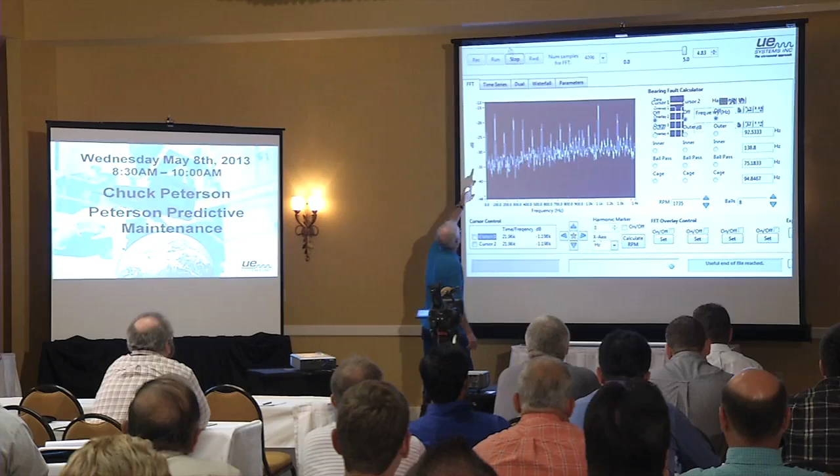So, Stan, put me a harmonic cursor. Well, bring it back. Put me a harmonic cursor on this one right here. Now, here. Just go to the top of it up there. Right there. Hold the shift key down and hit enter. Okay. He's showing 109, but he's not on it, right? So if we go down here, this will let us toggle. Bring this down until, and watch it move over.

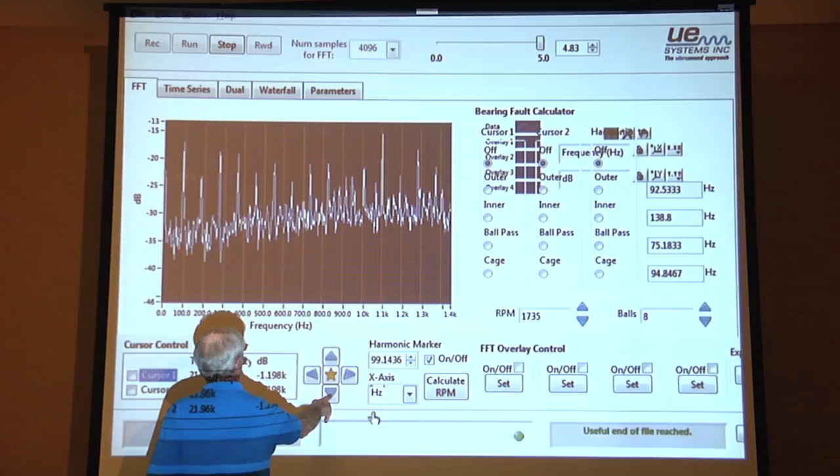Keeps going, keeps going. Keep on going. Down, buddy, down. No, do it right here. Go down. Why are you not going down? Oh, he's a lot smarter than I am on this. Okay, take it on down.

Whoa, right there. We're on every one of them, aren't we? We hit. That's the ball hitting that pit. Okay? And it's doing it at the same formula we used a while ago. Remember that number. It's 91. Okay? Bring the spreadsheet back up, the Excel sheet. This right here is the spreadsheet that he's starting to bring up.

Okay? So now, if I know this is a 6313 bearing, it's got 8 balls in it. The tag on the motor says 1735. So if I go to the 0 there, which is the speed, nope, this one over here. Right there. That's where I put my speed in. So 1735 and hit enter. That tells me that 92.5 is the fault frequency for the outer race on that 6313 bearing.

What was our number? 91, right? Okay, so if it's 91, what's changeable on this chart? We can't change the number of balls. I mean, that's pretty obvious, okay? So all we have left is speed, right? So let's drop that speed to about 1725. Okay, we're getting a little closer. All right, take it to 1710. Bingo! What it's just told us is we have an outer race failing on that bearing. Okay?

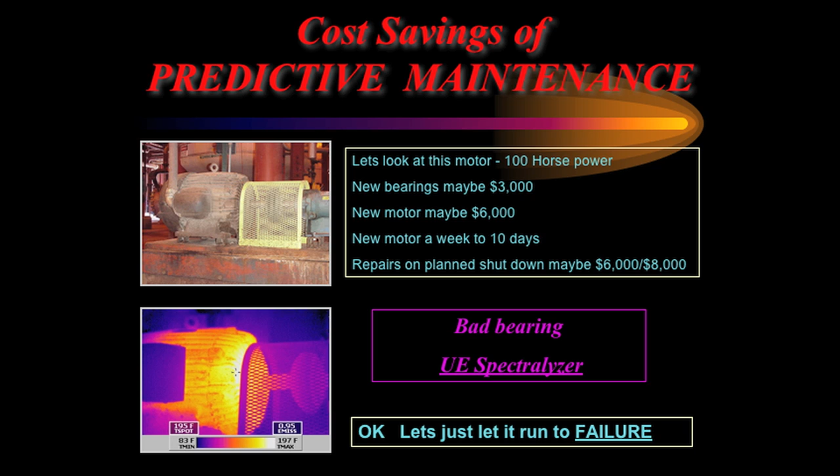With that in mind, let's look at that motor. This is the motor right here, okay? Here's the heat that we talked about. We know it's heating up. It's shaking. The outer race is showing a failure. The motor slowed down. I talked to Lowry and said, what are we doing?

He said, this is a 100 horsepower motor. We can put new bearings in it for about $3,000. All right? A new motor is going to cost us about $6,000. It takes a week to 10 days to get a new motor here. And I told him right away, you're dealing with the wrong motor company.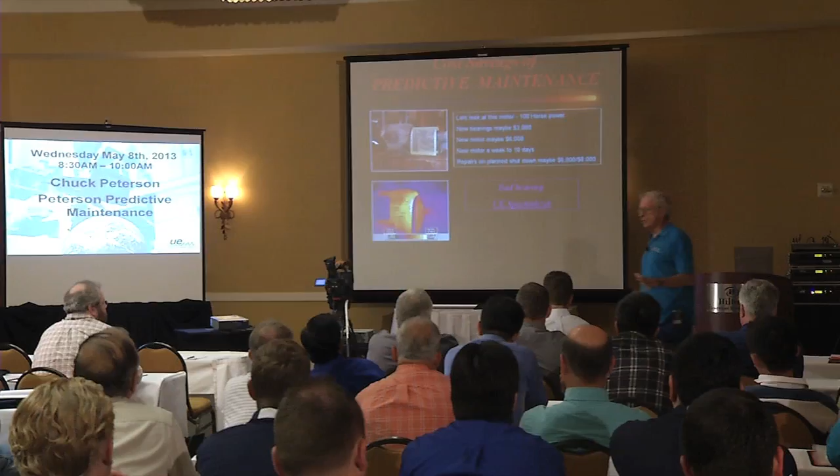I don't even buy motors anymore, but I still have enough connections that I don't care what kind of motor you need, I can have it at your plant at 8 o'clock tomorrow morning. It might cost you $50,000. But at $1.4 million a day, you don't care. I can get it there. Okay? The reason why I can get it there is because I know the motor companies that I used to deal with. When I dealt with them, I told them, look, I'm not keeping any inventory in my plant.

How many of you have spare motors? How many of you go out every 30 days and spin the shaft over? What happens? The motor's sitting here, the rotor is sitting down on that bearing. Trucks go by, trains go by, planes fly over. It's sitting there shaking. It's sat there for a while now, and it's worn flat spots in there, and now you put your motor in that was brand new on the shelf for a year, and you wonder, why did it fail in 6 weeks? Hell, it beat itself to death sitting on the shelf because we didn't spin it over.

What's the keyway on there for? We got 12 months in the year. January, February, March, April, May. I walk through the inventory shop and I can tell what month it is by looking at the shaft on the motor, because they are spun over and stopped at that month. Okay? Simple little PM program that costs you nothing, that can save you thousands of dollars.

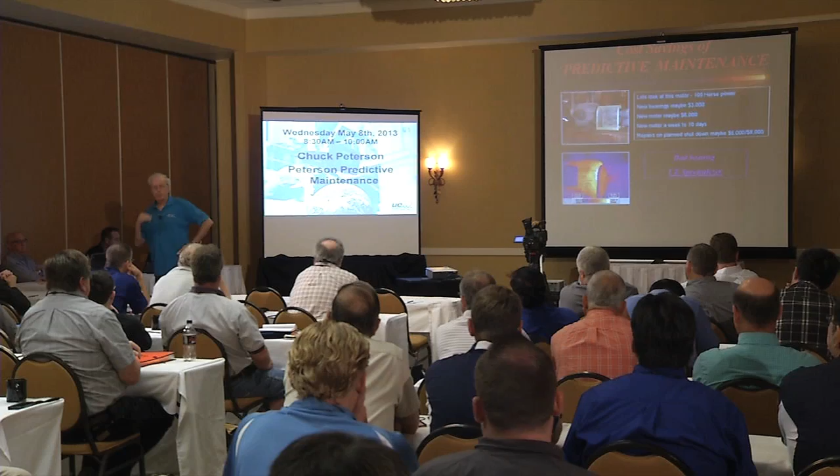If you would have fixed them when the cheaper told you to, you could have done it yourself for about $20 and some time. Now that you've let it go as long as it has and it's worn on that rotor, now you have to replace the rotor because they don't turn them anymore. You have to put the new pads on. You probably need to realign it because it's jerked to the right so bad. So you basically took a $20 job and turned it into $400.

Yes? Is that what they call it, a cheater? Yes, a cheater. A cheaper. Yeah, it's cheaper if you fix it yourself, right. Okay, good point. I'm going to use that.

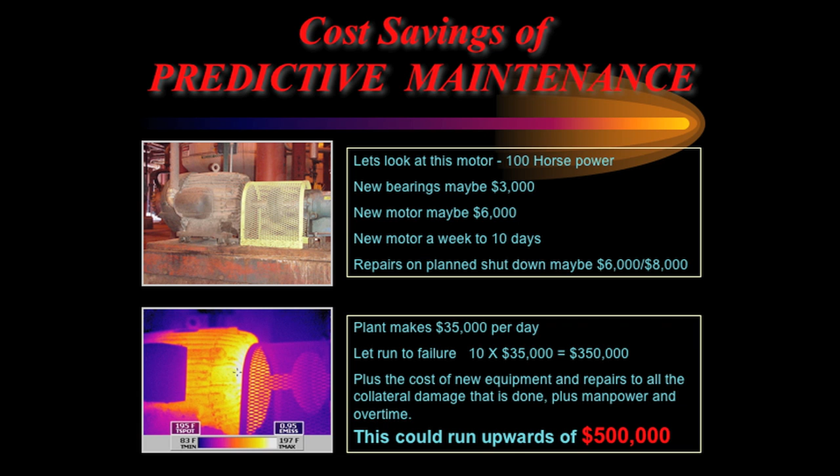Okay, so we look at this motor and apply the same thing. He said, we ain't shutting it down. I said, all right, we won't shut it down. Let's let it run to failure. That's what he says we're going to do. Okay, let it run to failure. When it runs to failure, the plant makes $35,000 a day and it takes 10 days to get a new motor. Right off of the top, we're $350,000 in the hole. Straight away.

Okay? The cost of the new equipment, $6,000 for a motor. It's pumping a slurry, so when it locks up, it probably twists the shaft off in the pump. So now we're $25,000 for a pump. We got to pay overtime, manpower, all this stuff to get back here and get it done and fixed right. We took a $6,000 to $8,000 job and turned it into $500,000 because we wouldn't make a decision.

Ladies and gentlemen, that right there is predictive maintenance. It cannot be explained any better, any way than that right there. Somebody has to make a decision. Because if you don't make the decision or somebody doesn't, it costs you a whole lot more money. It's that simple. Our job, my job, is to build the evidence of that crime. This is a crime. It's like an arson investigator.

I had to build the evidence of a crime, take it to the county attorney so that he could make the decision to file charges or not. I have to build the evidence of a crime here, take it to the plant manager so he can make a decision of whether we're going to shut down and fix it or not. It's up to him. It's not my problem. I document everything. He comes back to me and says, "Why didn't you tell me about this?" I said, "Whoa, ho, ho. I did." CYOA. Okay? A prime example.

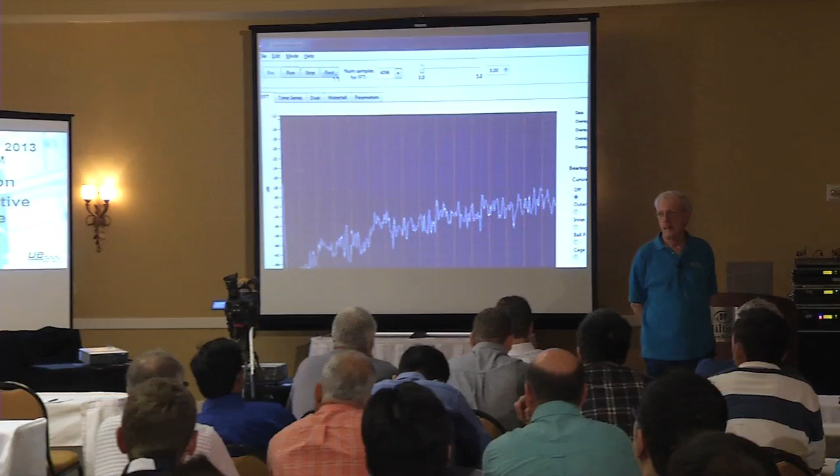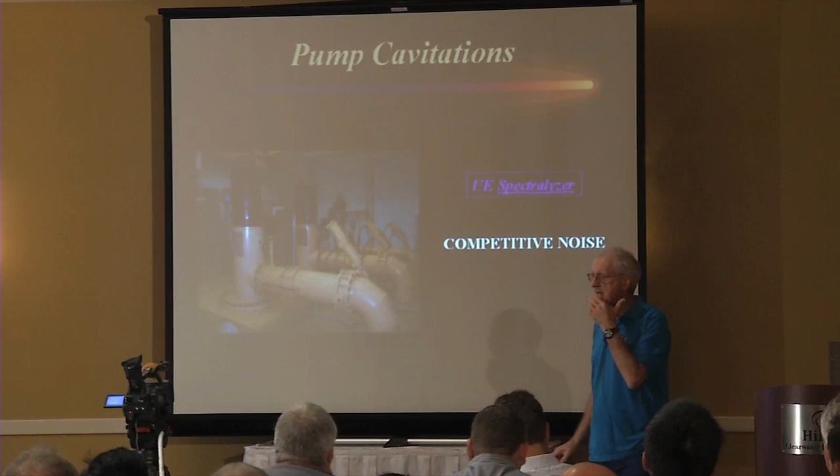That's pretty ugly. Okay, drag it off just a second there, Stan. I want to show them. I put the probe right there on that pump. That's where I made my recording, okay? We had a question about this earlier. What this is, it's cavitation, okay?

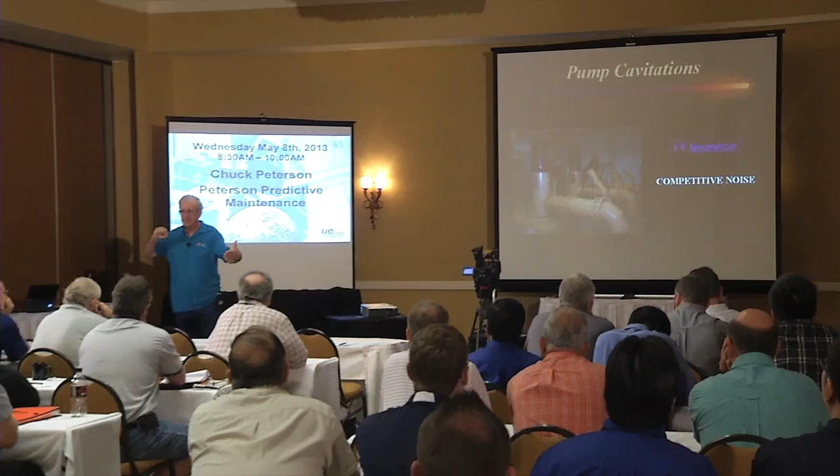The pump is trying to pull the water through there faster than it can get it there. So what happens is we separate the molecules. We have a void or a vacuum space there. When that hits the impeller, it explodes, and it actually can take chips out of your impeller. It can actually eat your impeller right out of your pump. So we cannot allow that to happen. They could not hear that because this pump is about 60 feet down in the ground. I put the ultrasound on it and I heard it.

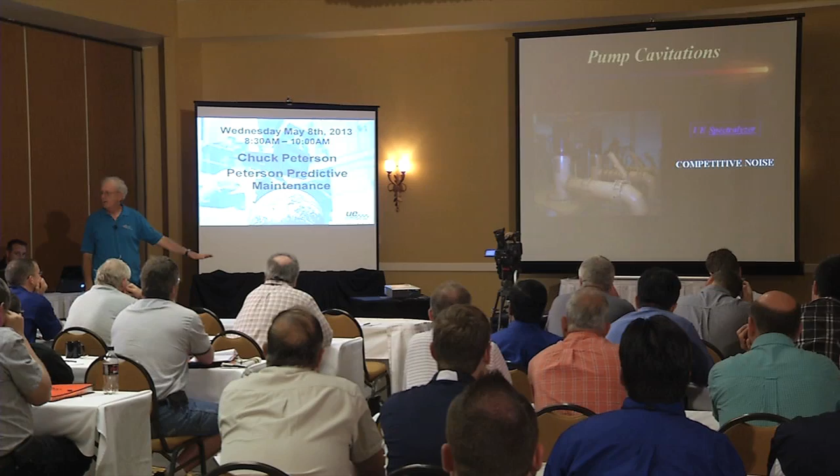How do we stop cavitation? We build pressure in the pump. How do we build pressure in the pump? Gate down the discharge. Never, ever gate down the suction. It's not getting there fast enough now. Why do we shut it down more? Okay? So on this pump, I actually took the valve and I turned it that much. A quarter of a turn. Okay? Now play it again.

After the correction was made, that would have never, ever been found without ultrasound. Never happened. Never happened. Okay? So we can drag that one off. I'd put a chain on this thing.

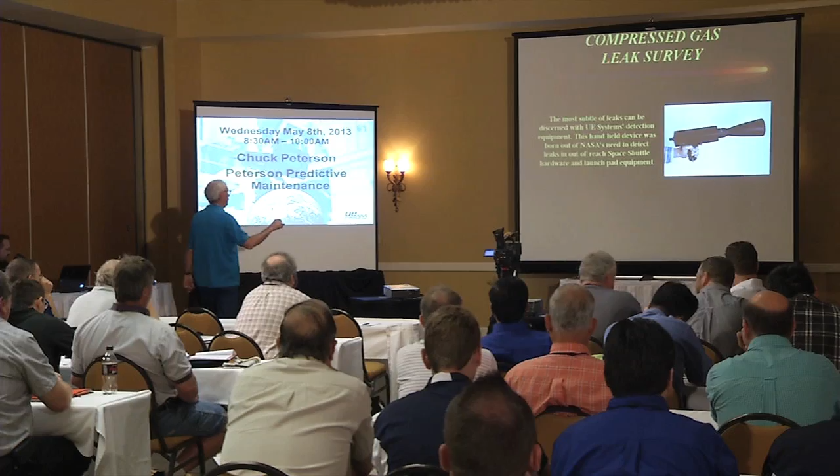Okay. Compressed gas surveys. How many people do them? Okay. Awesome. Let me show you something real quick. Next slide. Next slide. Run the argon. Can you just click on the one that says argon? It should load the program up. You have to bring it over here to do it. Click on that one.

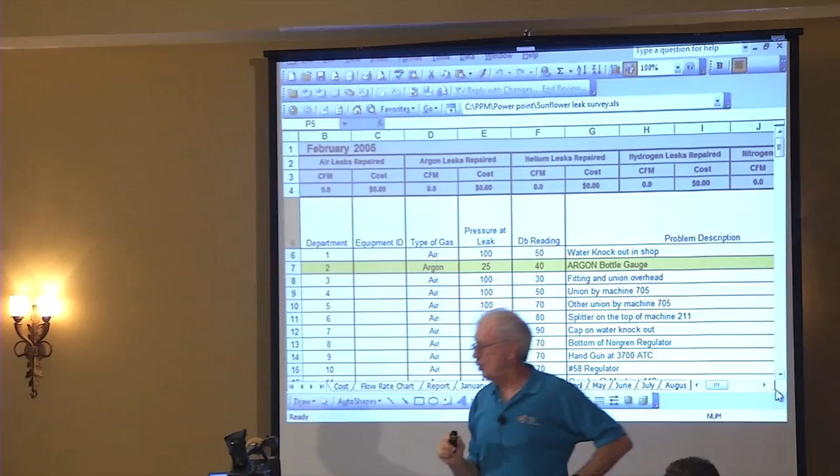Aha! This is a plant in Beloit, Kansas, okay? I told this guy, I said, look, if you let me go through your plant and spend 3 hours doing a survey, if I can't show you how to save enough money to pay for the whole program, I'll do it for free. He said, hey, let's get on that. So I spent 3 hours in his plant, okay? I found air leaks. I found argon leaks. Went through his plant for 3 hours, okay? Slide it over and show the total.

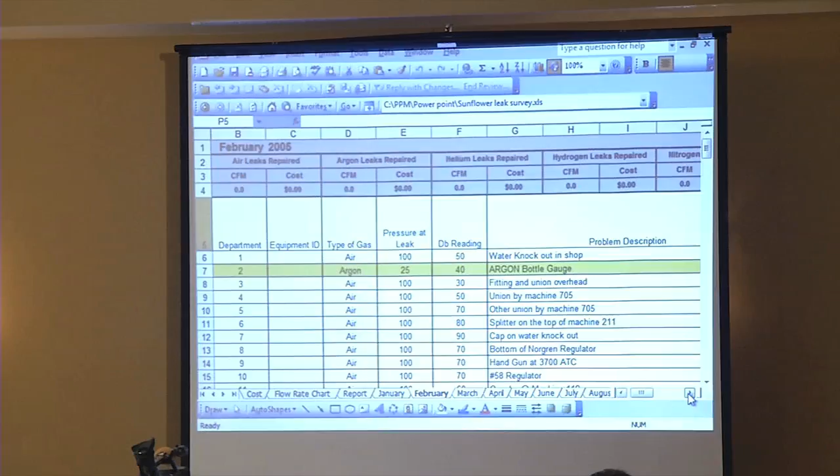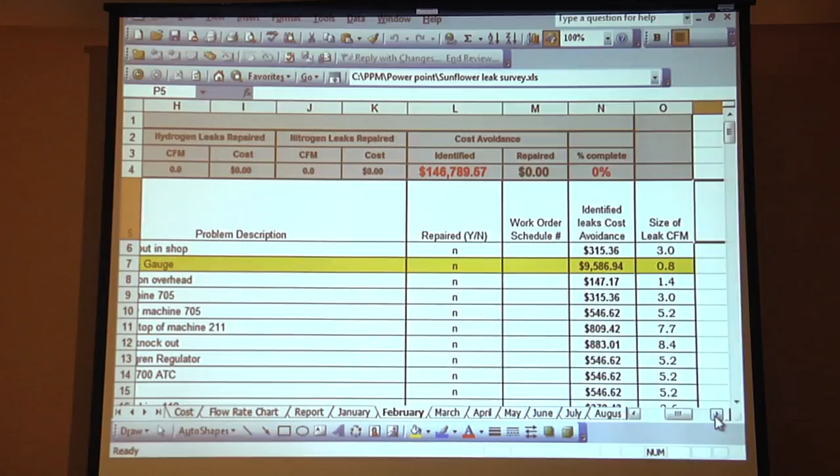$146,000 a year he was losing in compressed gases, argon and air. Needless to say, I didn't do that one for free.

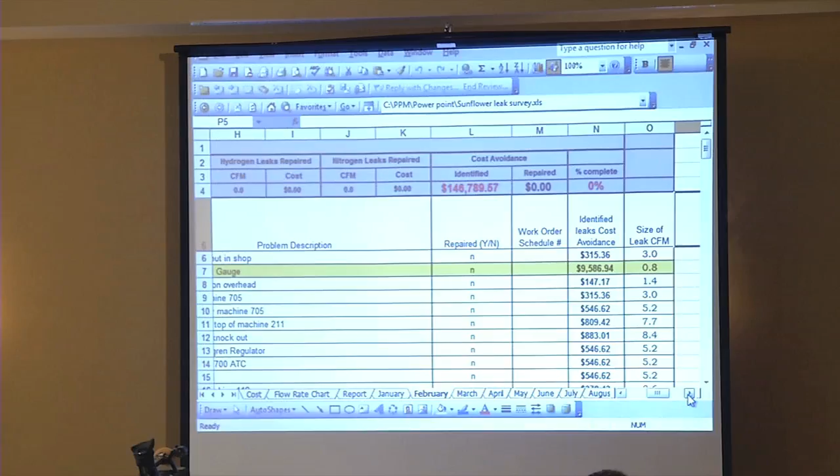Okay? So, okay, you can drag that off. I just wanted to show you that one right quick because we're lost. You can just close it if you want to. Just X out of it. Can't even do that, can we? Ha! Huh? Yeah. Hold the Alt button down and hit F4. Now close it. No. Awesome.

Okay. Next slide. Okay, so what I'm telling you, most people say there's no such thing as a silver bullet. I'm telling you there is. That $146,000 savings we just saw right there, that's a silver bullet. Document it. The $500,000 pump job we saw a while ago, that's a silver bullet. Okay? Now I'm going to tell you why we document those, why we keep them.

I document everything. Good ones and bad ones, okay? I keep the good ones in the front of the file drawer. The bad ones are in the back. If he wants to see them, I'll show them to him. But I ain't advertising it, okay? Now, when management comes down, which they do quite regular, they say, look, I got to cut the bottom line. Where's the first place they cut? Maintenance. Maintenance does not contribute to the bottom line. They protect it, but they don't contribute to it.

So he comes out here and says, okay, I got to cut the bottom line. All you people over here, y'all still got a job. You guys are gone. You still have a job, but you're going to start doing their job too, and I ain't paying you no more money. Remember, I'm cutting the bottom line. Okay? At that point in time, the maintenance manager needs to jump up on the table and scream and holler and jump up and down and say, whoa, wait a minute.